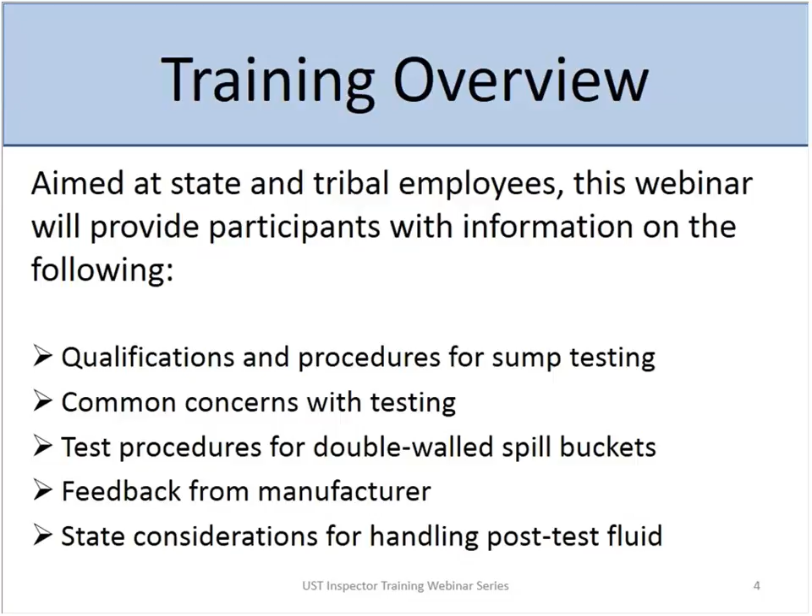All right, good afternoon, everybody on the East Coast, and good morning to those of you on the West Coast. For those of you who don't know CROMPCO, we're a large testing service provider, UST testing service provider, primarily on the East Coast. If you haven't heard, or you've been living under a rock, you know we have new EPA regulations that we're going to need to deal with. So we're going to get into talking about the sump testing and spill bucket testing that's coming up. There's a number of changes that have been included in the regulations, including overfill, checking the overfill equipment in the tanks, checking ATGs, monthly walkthrough inspections. We're not going to be covering that. We're going to be focusing on spill bucket testing and containment sump testing.

So what you're going to need to do, you're going to need to get familiar with the new standard, PEI RP 1200.

RP 1200 has been developed since 2010. It began development when a committee was appointed by PEI in 2010 in anticipation of these new federal rules, and we were hoping to get it out in plenty of time before the new regulations. We did get the document out in August of 2012. It was published. As you know, the new EPA regulations didn't come out until 2015, so we were well ahead of the regulations, and then we actually just finished reviewing comments and making revisions to the document.

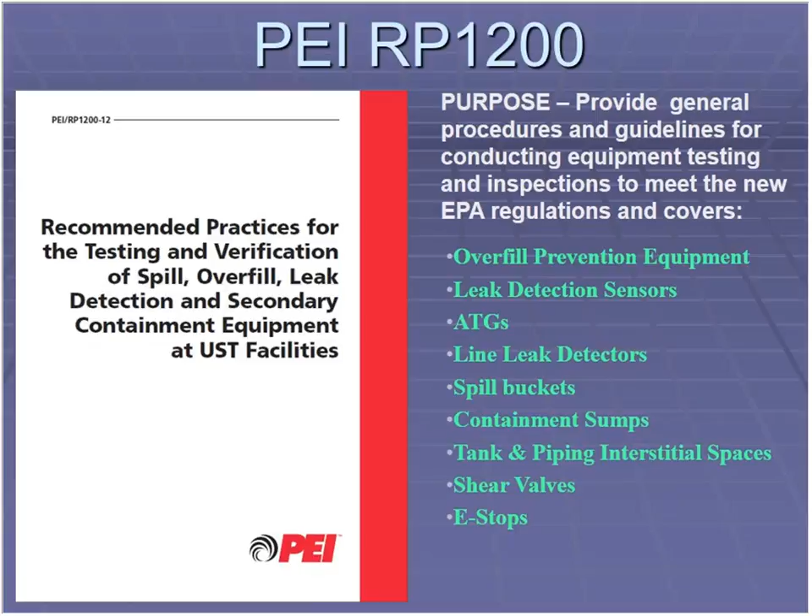So that's a little bit about the timeline of the document. The document covers everything with the new federal regulations: overfill prevention, leak detection sensors, automatic tank gauge testing, electronic and mechanical line leak detectors, spill buckets and containment sumps, which is going to be our focus today, tank and piping interstitial testing, shear valves and e-stops. It's all covered in that document, so you can use it to reference all those standards or tests.

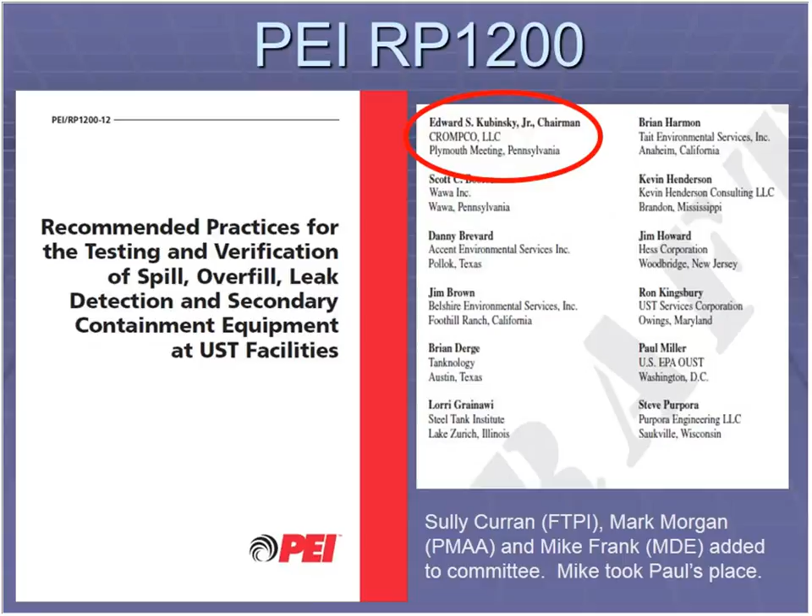I am the chairman of the committee, so I guess the buck stops with me. You can see all the different members of the committee. We had a good group of owner-operators, testers, installers, and regulatory agency representatives all involved in developing the document. We just recently added a couple new guys to the committee, including Mike Frank from the state of Maryland, who took over Paul Miller's place as the regulatory body.

So Chapter 6 of RP 1200 covers spill bucket testing and containment sump testing. With the new federal regulations, the first routine test date for spill bucket testing in most of the SPA states has not been determined yet. However, the EPA regs have gone into effect in the non-SPA states. I'm assuming everybody knows the difference between SPA and non-SPA states. So if you're in a non-SPA state, the first test of spill buckets is due by 10/13 of 2018.

So when we're doing testing of spill buckets, we're going to want to follow manufacturer's guidelines, RP 1200, which is an industry standard, or if the state develops a standard of its own, you can follow that. New buckets installed after the onset of the rules need to be tested at installation and then periodically thereafter, unless they're a double wall spill bucket being monitored monthly, in which case the EPA rules say those buckets would not be required to be tested. However, single wall spill buckets are going to need to be routinely tested, and double wall spill buckets that are not being periodically monitored are going to need to be tested.

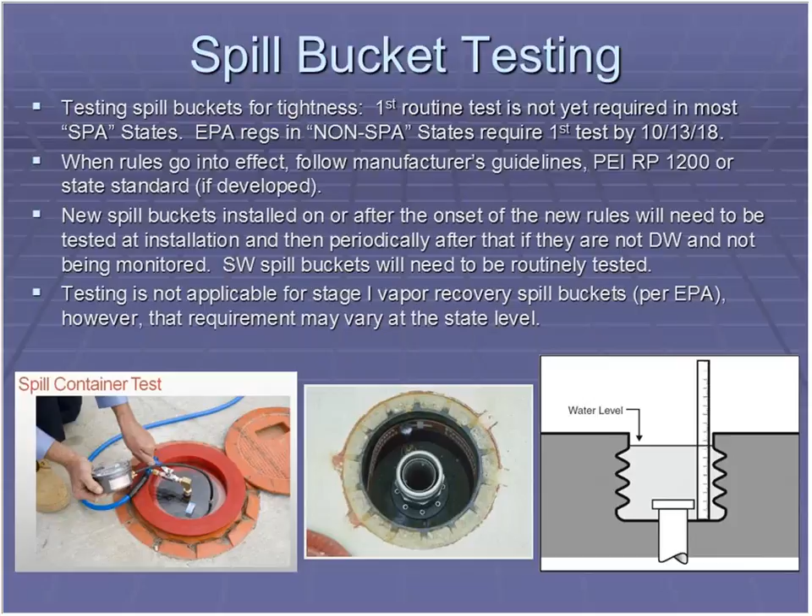Testing is not applicable for the stage 1 vapor buckets per the EPA. However, each state is going to need to determine that on their own, and you'll see in a few slides what I'm talking about there.

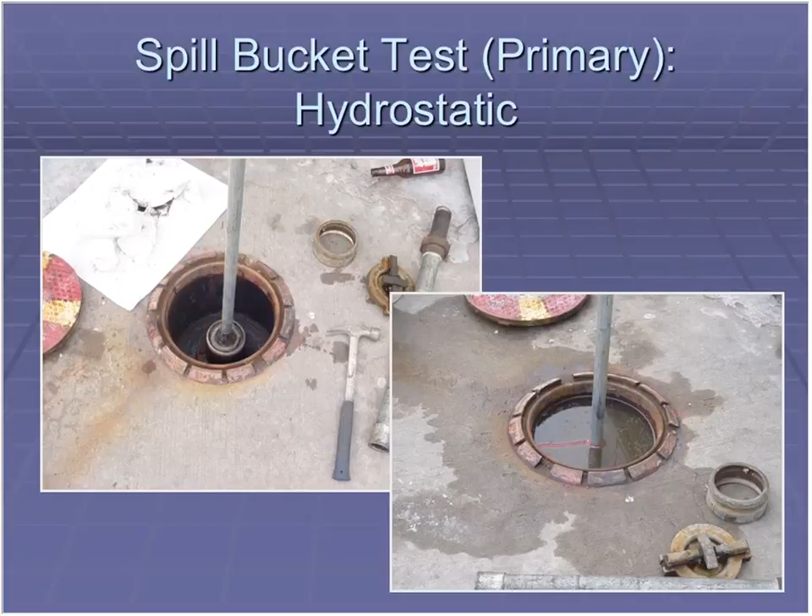So we'll start out with the hydrostatic testing of the spill buckets. As you can see here, we have some plumber plugs installed in the fill risers. Drop tubes have been removed. Spill buckets have been cleaned out. We find all kinds of crazy stuff in the spill buckets. Beer bottles are not uncommon either, but we want to clean these spill buckets out as best we can before running a test.

So here's what it says in RP 1200: you're going to clean, inspect, and repair any defects of the bucket before running a test. You can leave the fill adapter and cap on when you do the test. RP 1200 has given the testers and owners latitude to make a determination if they want to run the test with the fill cap installed, or they can remove the cap and adapter and use a plumber's plug and seal down below the drain so you're testing just the bucket.

Obviously, if you're allowing the drain valve to be installed during the test, you want to make sure that the drain valve is leak tight before doing the test, or remove it and seal it. You're going to fill the bucket to within 1.5 inches of the top of the bucket. You're going to use a straight edge and measure the water to 1/16 of an inch. You're going to wait 1 hour, and then the pass or fail criteria is 1/8 of an inch drop over the course of an hour. If it drops 1/8 of an inch or greater, the test is considered a fail.

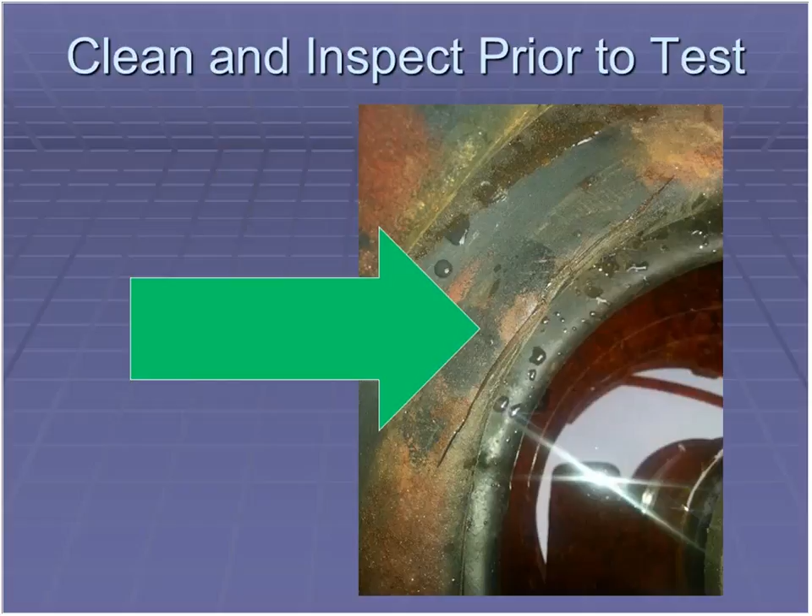So here's some things you want to look at when you're preparing to run a spill bucket test. You want to look for any cracks or holes in the spill bucket, small cracks. For large cracks like this, you're not going to want to run a test just to confirm a failure.

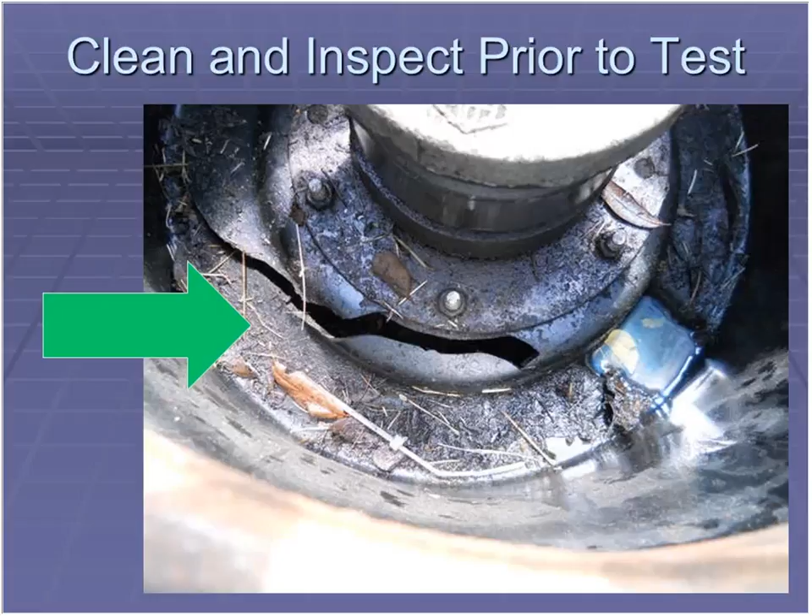Obviously, the spill buckets have most likely contained fuel, so you don't want to put water in there and knowingly let it release into the environment. So this is something that we would consider a visual fail. We would fail that spill bucket just on visual confirmation, let the owner know and provide a test result to the customer and regulatory agency.

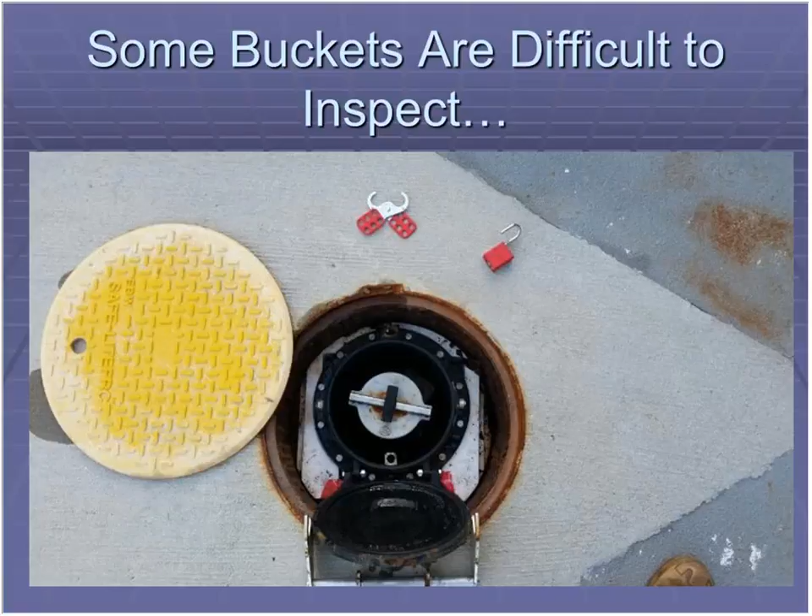Now, some of these spill buckets that you're going to come across are going to be difficult to do a good visual inspection on, as you can see here. And this is going to cause problems for these monthly visual inspections as well. So some of these spill buckets are very hard to do a visual inspection. We're going to have to maybe use a mirror and a flashlight to get in there, intrinsically safe flashlight for safety purposes.

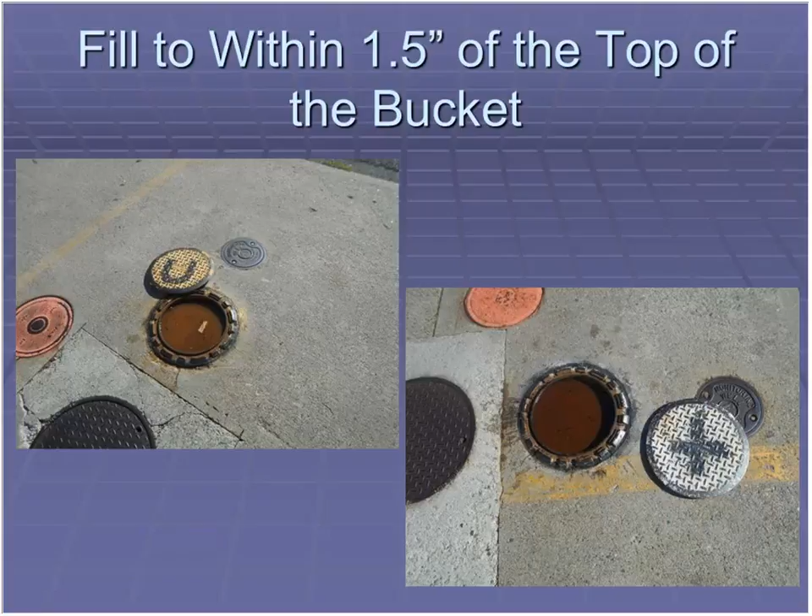So try and inspect them as best you can. And then if you're leaving the cap and adapter in place, this is typically what you're going to see when you're running your spill bucket test. Fill it up to within 1.5 inches of the top and run the test for an hour.

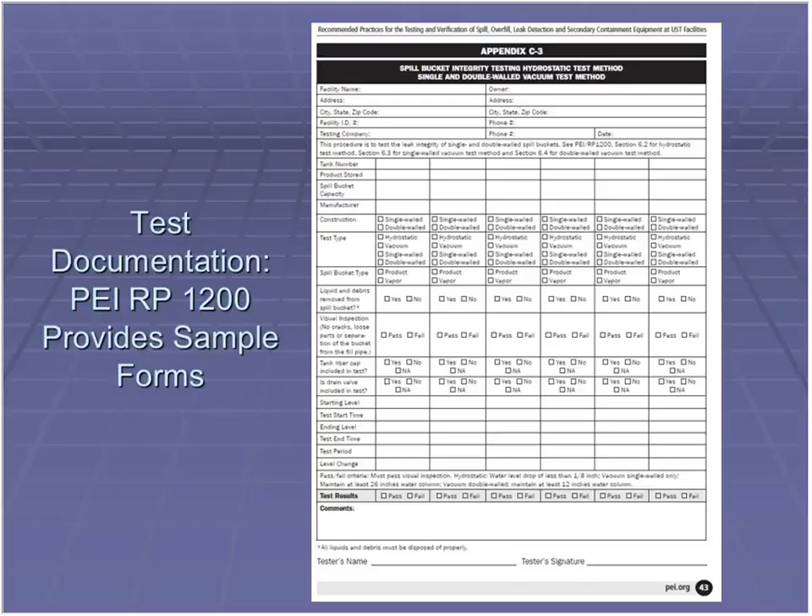Now, in the back of PEI RP 1200, we do provide some sample forms for documenting these tests. So if a state is looking at developing their own forms, you can look at the RP 1200 document. All the testing companies, us included, we have our own forms. These things may be changing over the years. I know a lot of states are considering developing their own forms. The state of Maryland just came out with their own form just a couple days ago, and we're going to have to look at including that into our system.

So moving on from hydrostatic testing of spill buckets, now I'm going to get into another option that you can do for testing spill buckets, which is vacuum testing.

Basically, if you're doing vacuum testing, you're going to do the same thing you do with hydrostatic testing. Clean, inspect, repair any defects with the spill bucket. You can leave the cap and adapter in place, or you can use some type of plumber's plug to isolate the tank from the vacuum test. Make sure your drain valves are leak tight. Put the cover on - it's a single wall spill bucket. You're going to apply 30 inches of water column vacuum. RP 1200 says hold it for 1 minute, and as long as the vacuum level is above 26 inches after that 1 minute, the test is considered a pass.

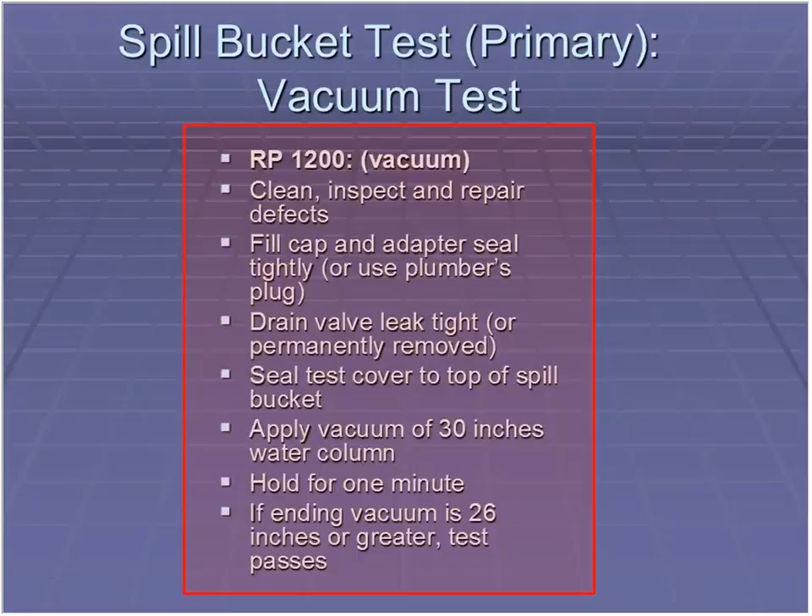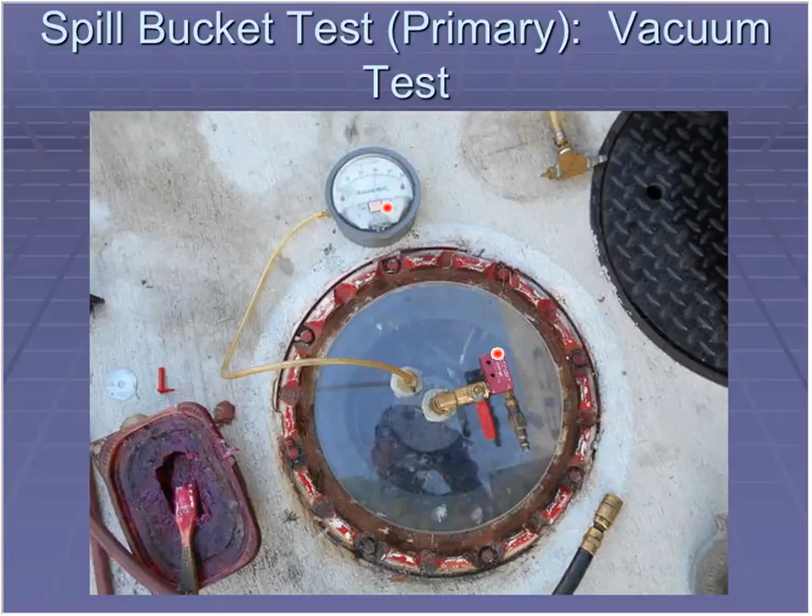Here's some more pictures of primary testing, spill bucket testing of a primary bucket. Here's a single wall bucket. You can see there's a cap installed on the fill riser to isolate the tank from the test, and a little bit better picture of the small venturi that we're using to create the vacuum. 30 inches of water column vacuum, can't drop below 26 after 1 minute.

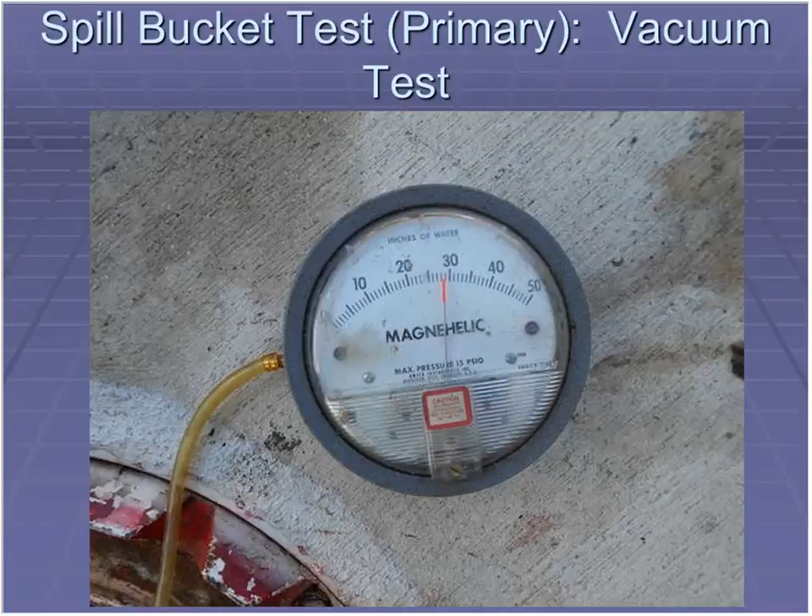So if we're testing double wall spill buckets, some of the manufacturers you'll hear about a little later in the program, but we have a general guideline for testing the interstitial space of double wall spill buckets. Again, clean, inspect, and repair any defects. You're going to attach your hose to the secondary access point of the spill bucket. And when we're doing the interstitial, we're only going to apply 15 inches of water column vacuum as opposed to 30 inches for doing the primary. Again, we're going to hold for 1 minute, and after 1 minute, as long as the vacuum is 12 inches or better, the test is considered a pass.

So some things that you want to consider as you're formulating your regulations over the next 18 months or so: what about double wall spill buckets that are not being monitored? Obviously, EPA says that they're going to need to be tested. So I use Maryland as an example here. The state of Maryland, who we routinely do business in, we've asked them, is the test of the primary spill bucket acceptable in Maryland? And actually they say no - we must test the interstitial space of a double wall spill bucket in Maryland. That's what they require. Other states are going to need to interpret this and provide guidance to owner-operators and those doing testing in your areas.

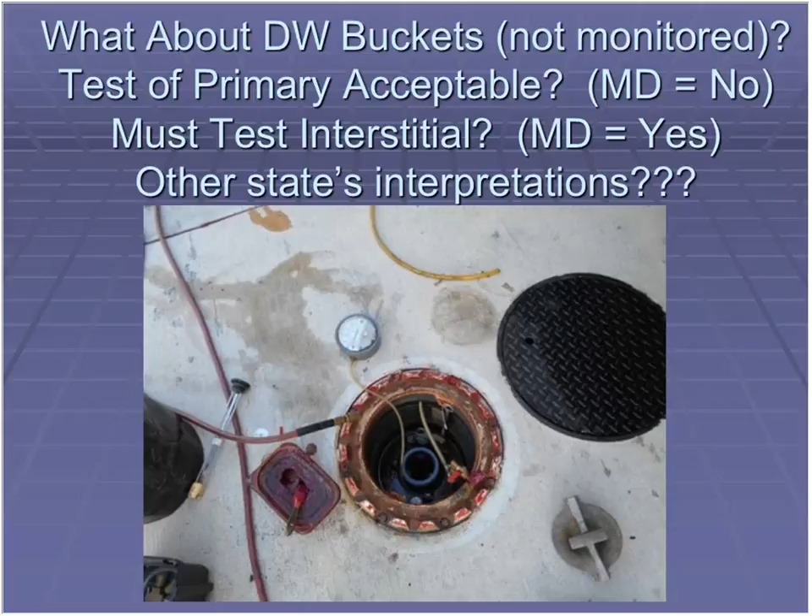All right, some of the spill buckets, double wall spill buckets, have electronic sensors and there are also mechanical gauges installed in them. So if the bucket's double wall and it's monitored monthly. According to the feds, no periodic test required.

However, the state of Florida just came out with their new rules. Double wall spill buckets still have to be tested every 3 years. Maryland, we're testing the interstitial annually. Other states, what are you going to do when it's your turn to formulate your regulations?

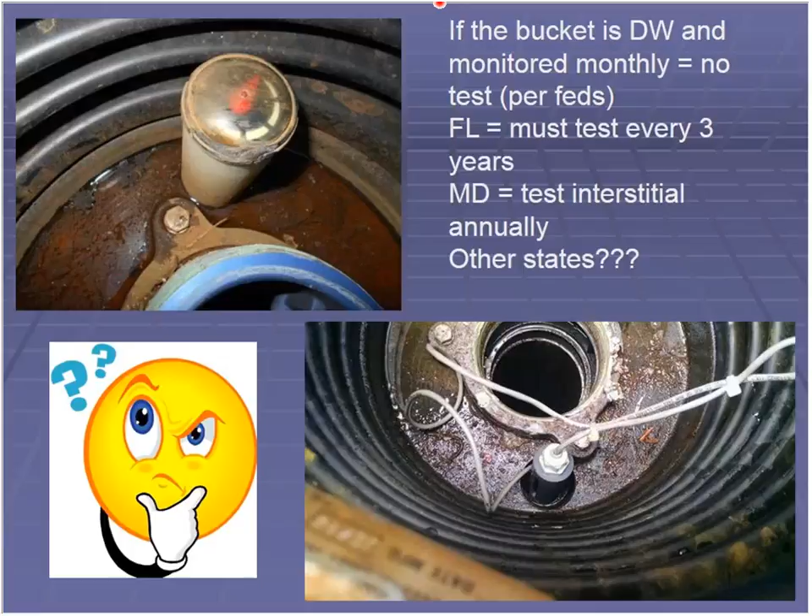Another caveat that we run into: if the bucket's double wall and it's monitored with a gauge, a couple states are requiring that the owners verify that that gauge is checked for proper operation once a year. State of Maryland, state of Florida.

So we need to physically remove the gauge. This type of gauge, we have to dip in a cup of water and make sure that the gauge is functioning properly, and then reinstall the gauge back into the double wall spill bucket. Again, what are other states going to do with this?

Something to think about. As I mentioned earlier, we do see spill buckets installed on the stage 1 vapor recovery port of your gasoline tanks. According to EPA, no test is required for the stage 1 vapor. State of Maryland says yes. What are other states going to do? This is a question that routinely comes up with our customers and that we need to have the answer for. So be prepared to provide guidance on these things as we move forward.

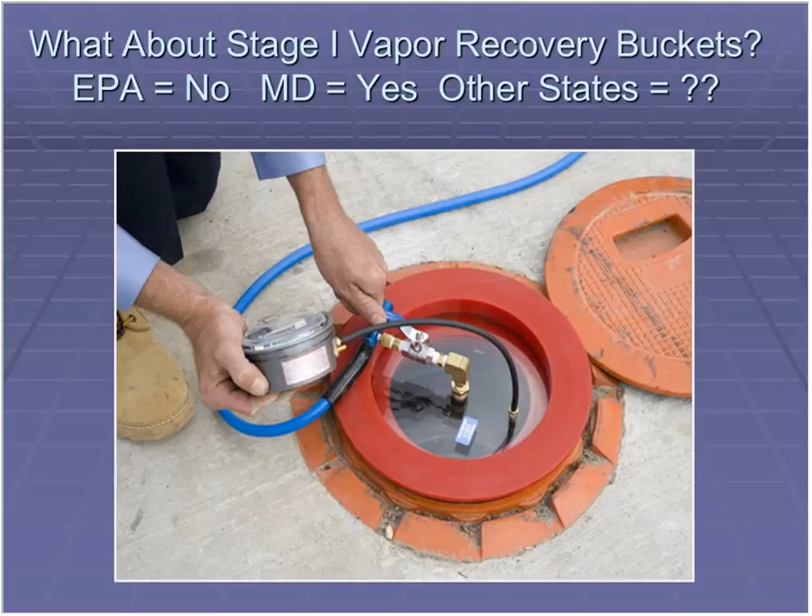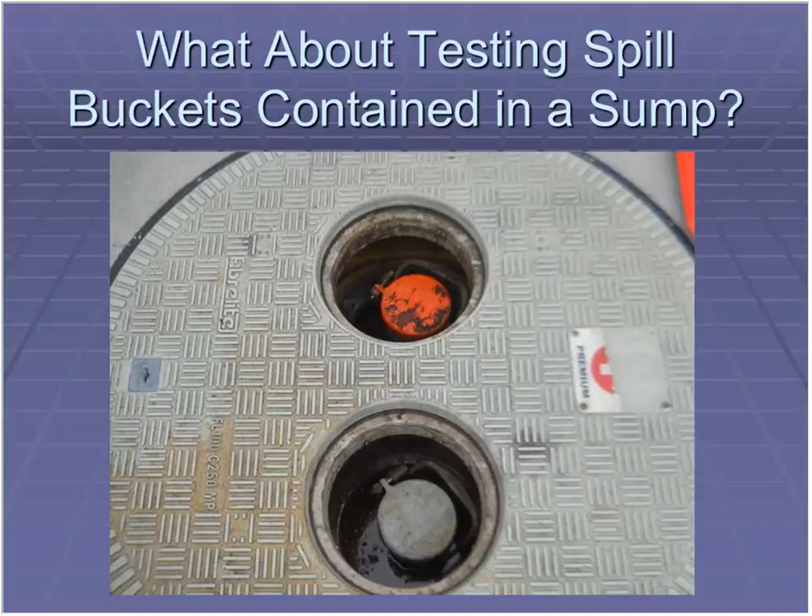Also, what about testing a spill bucket in a containment sump? You have a sump underneath the bucket. Do we really need to test the bucket? You're going to need to provide some guidance on that. These are some things that we typically see out in the field.

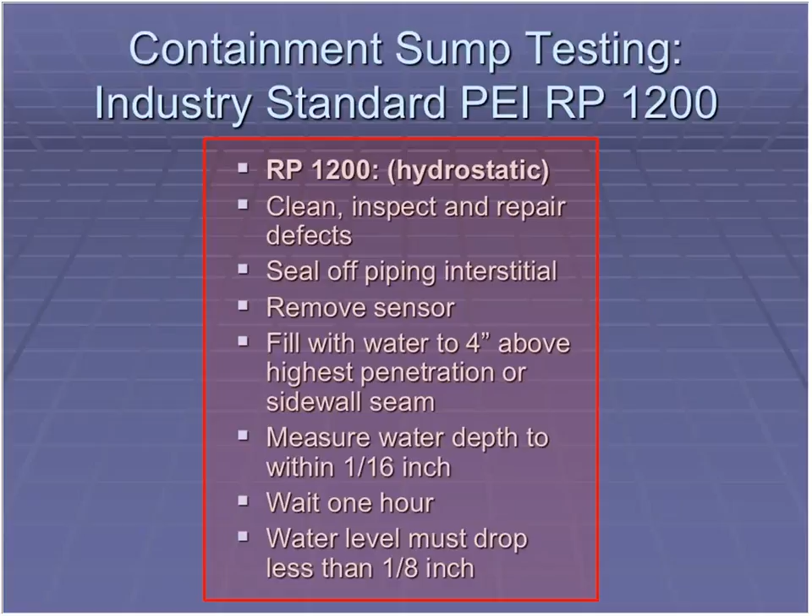We're going to fill the containment sump 4 inches above the highest penetration or sidewall seam. Again, just like the spill bucket, measure to the 1/16 of an inch, wait 1 hour, and the pass-fail criteria is 1/8 of an inch or greater is considered a fail. 1/8 of an inch or greater loss in the containment sump over the course of an hour is considered a fail. So again, you're going to want to take a real good look at all your penetration fittings and your sump seams prior to doing the test.

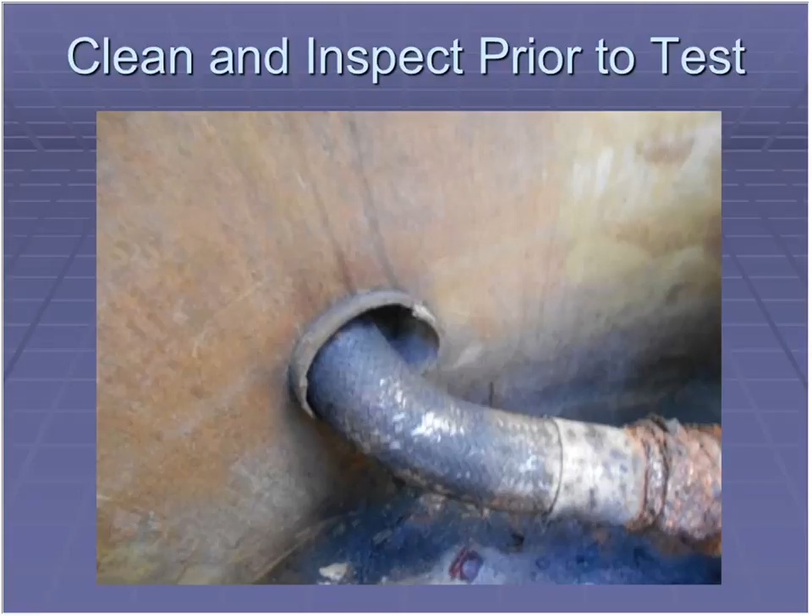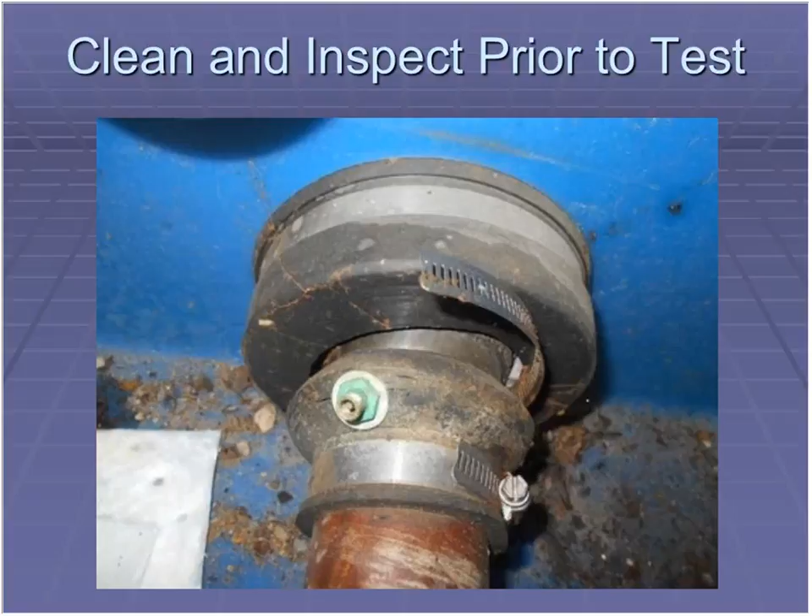Obviously, something like this, you're not going to be able to test it because you can't seal off the piping. Here we see bad boots. These are typical things that we see when we're going out to do testing. And in these cases, you're not going to want to run a test just to confirm the fail. You're going to want to get that repaired and ready to test properly, not just throw the water in there so that it gets into the secondary containment.

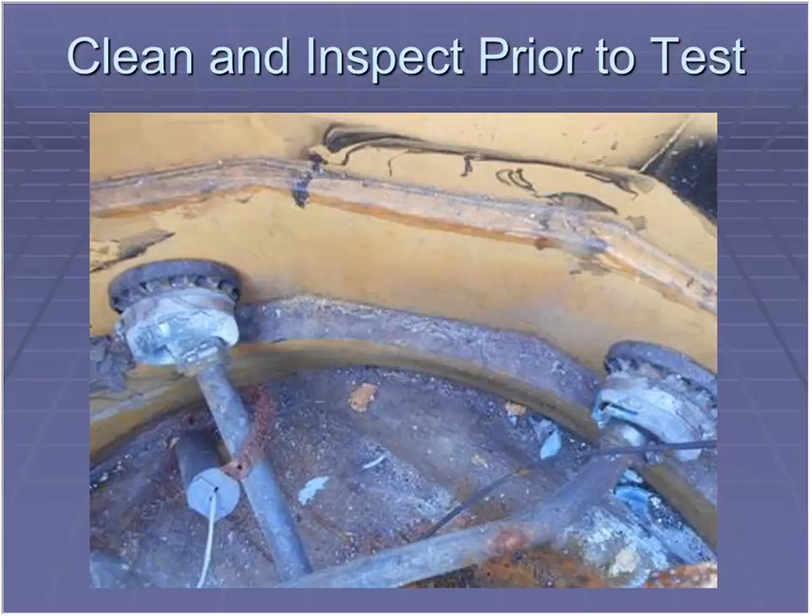So again, more pictures of what we see when we're going out to do containment sump testing. Make sure you take a real good look at these sumps before running a test. Electrical conduits are often a problem as well, and we've run into some cases where we're actually filling up above electrical conduit junction boxes. We're going to need to make sure that those are able to be sealed off properly as well. We don't want water getting into the electrical conduits.

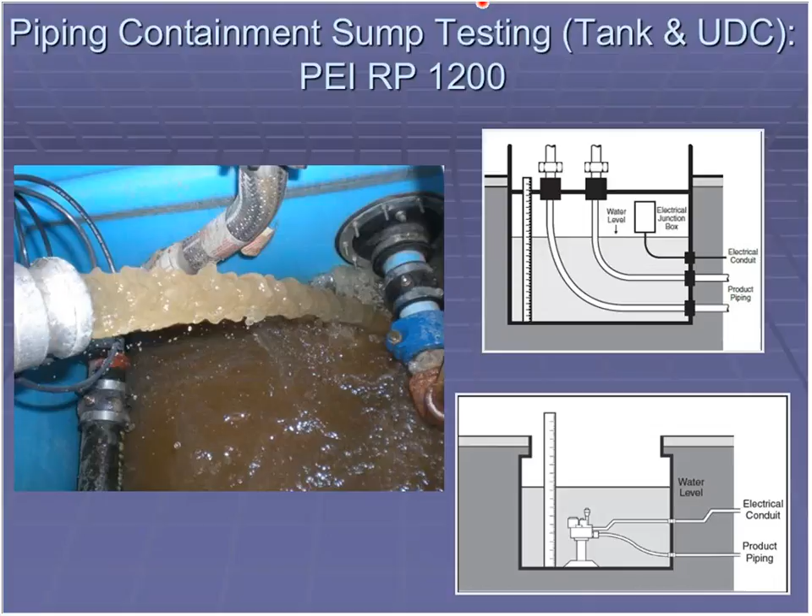So once we've done a good inspection of our sump and we're ready to fill them with liquid, here we are filling a dispenser containment sump. We're going to fill it 4 inches above the highest penetration or sidewall seam, measure it, and run our test. Again, RP 1200 provides sample documentation that you can use when doing the testing.

Now we get into the questions again, what about testing sumps that contain spill buckets but no piping in them? So there's no piping leading out to the dispensers under this containment sump. Does it need to be tested? According to EPA regulations, no, because this sump would not be relied upon for release detection. However, other states have said yes, we want all sumps tested. So you're going to need to make that determination when you're coming up with your new rules. Another picture of what we typically see.

So I'll stop right here and take a question or two on sump testing. Sure. So thanks, Ed, and thanks to the audience, everyone. We've got a lot of questions here, so I do have a running docket that I'm keeping. There's no way we're going to get to all of them today, but I will try to cherry pick a few out of here.

Let's see. If you fail the vacuum test, can the owner turn around and use a hydrostatic test to try and pass, or do they have to stick to the vacuum test?

That's a great question. We have that conversation with our customers. Just a note about vacuum testing: in our experience, it's a little bit more difficult to pass a vacuum test than it is the hydrostatic test. So a lot of customers of ours will ask us to run a vacuum test of the spill bucket, and if it doesn't pass the vacuum test, then we'll run the hydrostatic test, and if it passes the hydrostatic test, it will be considered a pass.

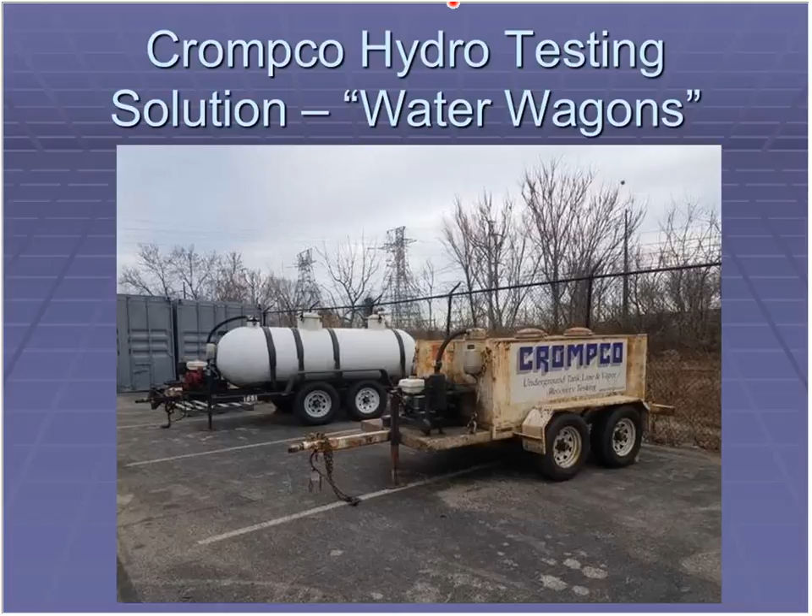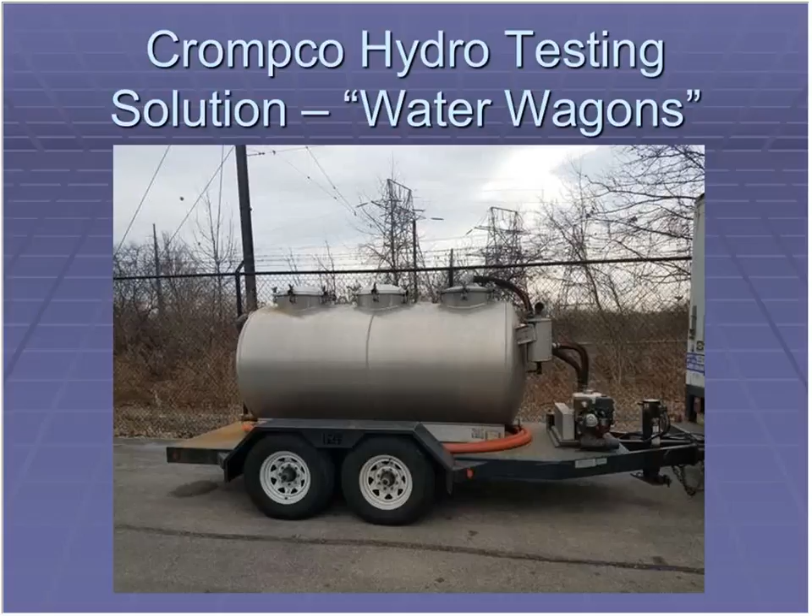These are some of our older water wagons, but this is the latest and greatest. It's about a 500-gallon tank that we fill up with water. We trailer it to the site, use the water for a couple tests, and then dispose of it. So back here at our yard, we have a large potable water tank where we have clean, fresh water that we use for testing, and we can somewhat rapidly fill up our water wagons. And then we also have a 5,000-gallon trailer in our yard where we pump the dirty water after containment testing, and then we have a vac truck company come out and clean that trailer out periodically and properly dispose of the water after testing.

I know that Natalie and Heather are going to get into the water disposal questions, but I just wanted to share with the audience that's how Crompco handles hydrostatic testing of containment sumps. I'll take a question or two real quick on that. If not, we'll move forward. I think we're all set on that for now. Okay, we'll keep going then.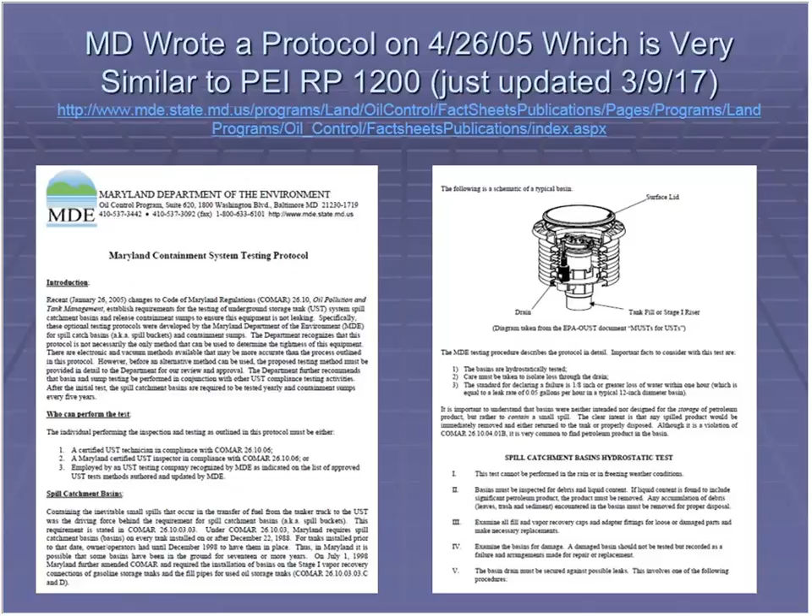All right, I'm going to share with you some data that we've run over the course of several years, specifically with the state of Maryland. We've been doing containment testing in the state of Maryland since about 2004, 2005. Maryland was the first state that I was aware of that came up with a hydrostatic containment testing protocol. They just updated their protocol and developed a form just a couple days ago, as I mentioned. And the RP1200 protocol was based very much on the Maryland containment protocol.

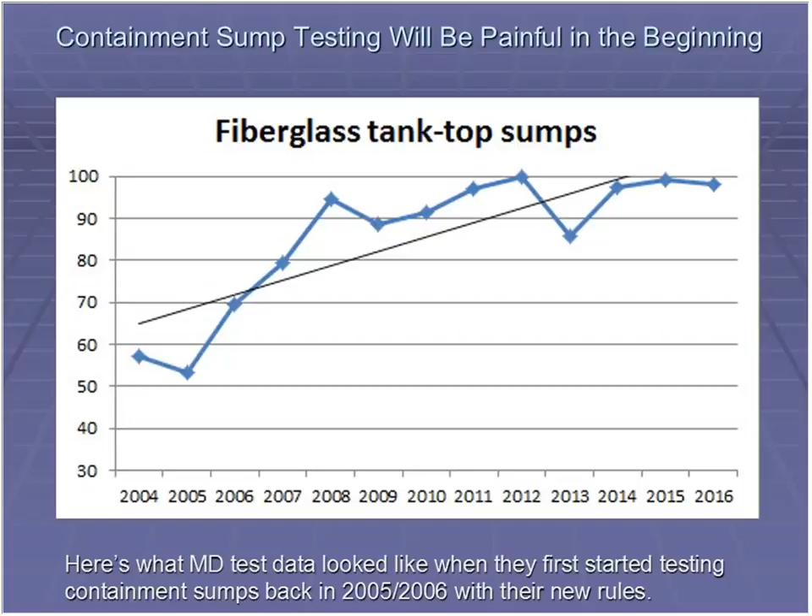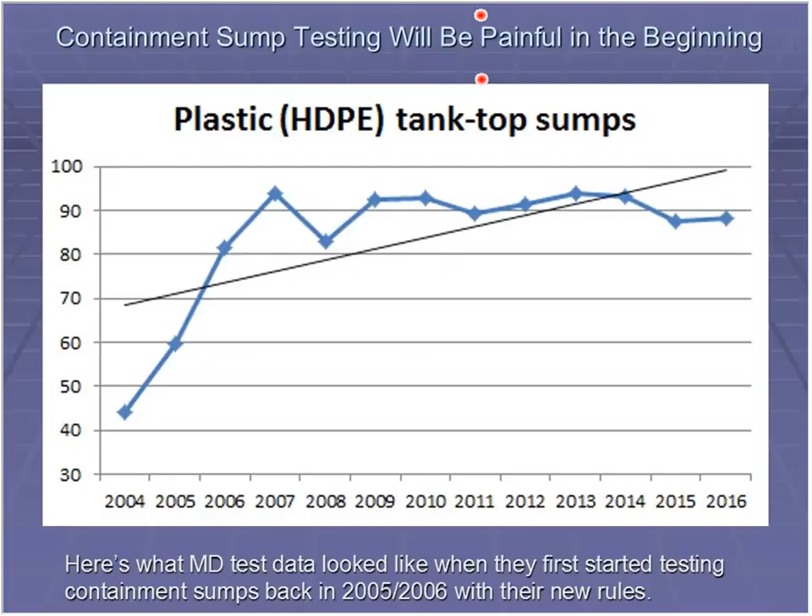Here's some data that we compiled on fiberglass tank top containment sumps. We saw just a little bit better than a 50% passing rate when we first started testing, but as you can see over the course of the years, things did get better. So these are all passing percentages of tests. Your high-density polyethylene sumps didn't fare quite as well as the fiberglass sumps. We saw just over a 40% passing rate when we first started testing back in 2004, and we're up around the 90% passing rate right now.

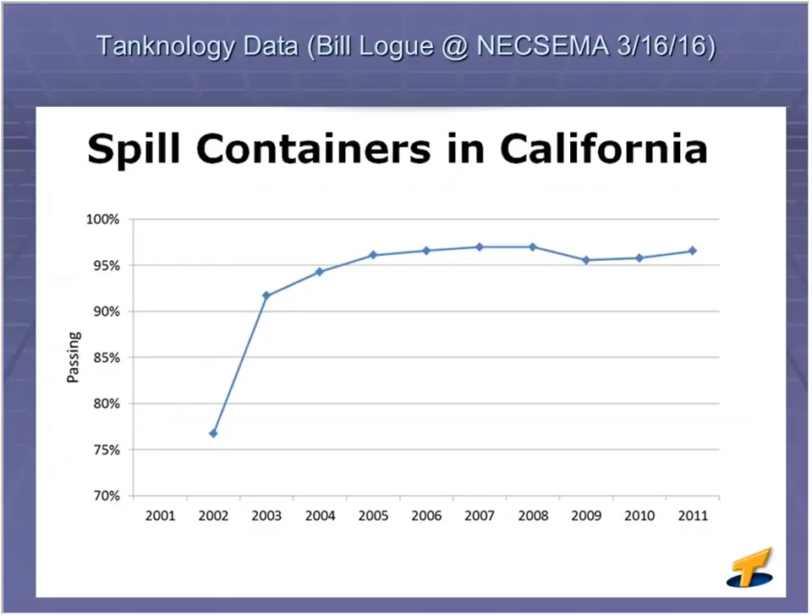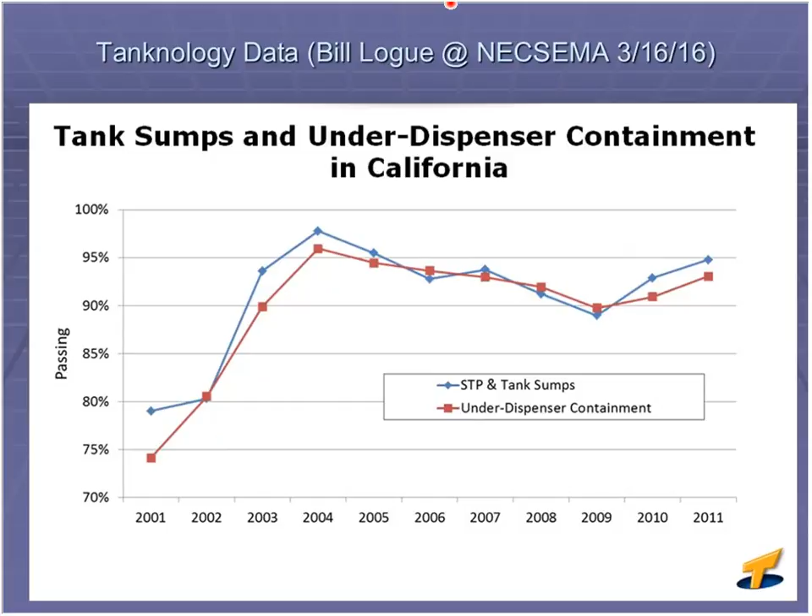There's going to be issues discovered. A lot of repairs are going to need to be made. New spill buckets going in. So that's what we can expect. But the bright side is things do get better over time.

So with the RP1200, we did receive a lot of comments about considering going to a lower level of testing, and as the committee discussed that, we didn't feel that it was the best move for industry. However, we know that some states are considering allowing for low-level testing. The State of Massachusetts in 2015 put out their new regulations, and they said that if you have a sensor in your sumps, you only need to test to the level that the sensor will activate.

And if you don't have a sensor, you'll need to hydrostatically test your containment sumps to the top of the sump. So what we saw between January of 2015 and toward the end of last year was a lot of customers putting in sensors in their dispenser containment and tank top containment, so they didn't have to hydrostatically test their sumps to the top. Because as you know, once you get over the penetration fittings, that's where a lot of your problems are, and you're going to see failures. So if the option was there for them to test below the penetrations, they wanted that, so they put in sensors in Massachusetts so they wouldn't have to test above the penetrations.

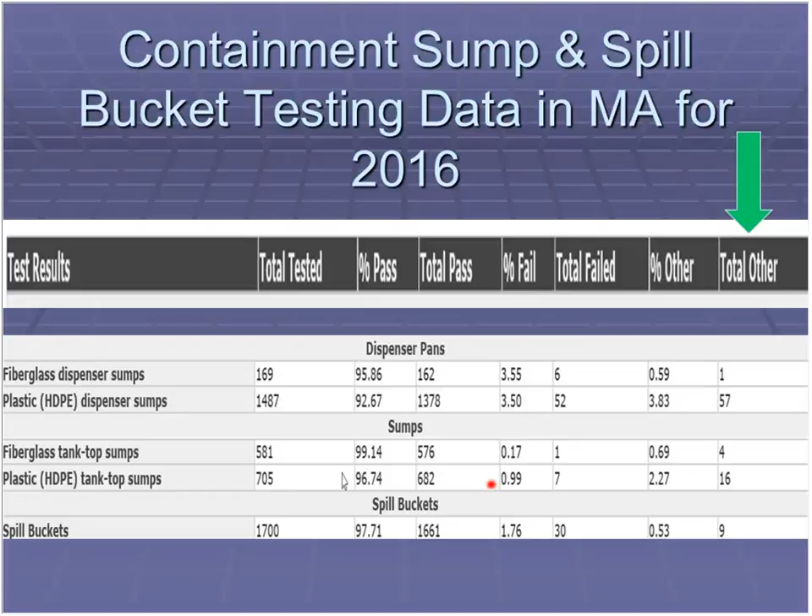So from the tester's standpoint, we do have a little bit of confusion when going from state to state to do the testing. One state's regulations here say that containment sumps need to be liquid tight for at least the bottom 3 inches in order for the leak detection sensors to work, and there can't be any penetrations below 3 inches. However, in the back of their regulations, they do say sump and containment testing should be done to the PEI RP 1200 protocol, which is filling it up to 4 inches above the highest penetration or sidewall seam. So it's just kind of interesting wording that you only have to be liquid tight at the bottom, but we're going to need to test above all the penetrations.

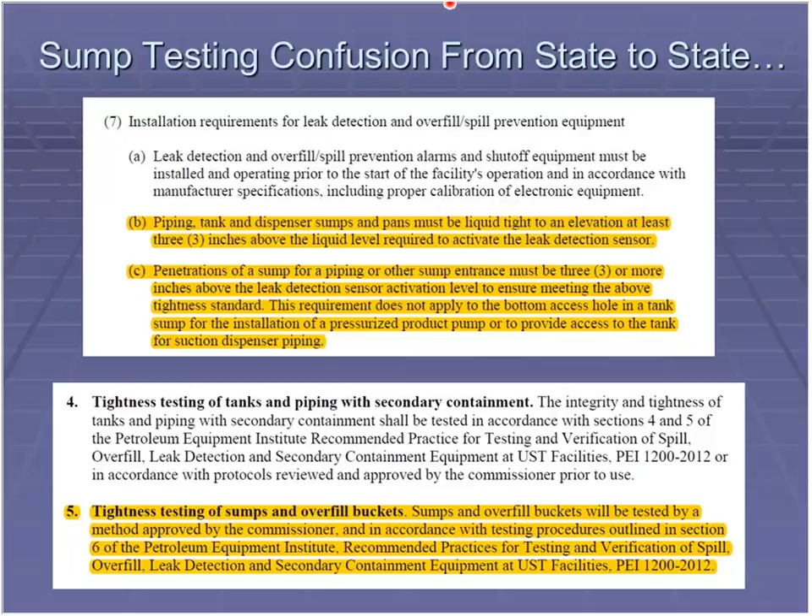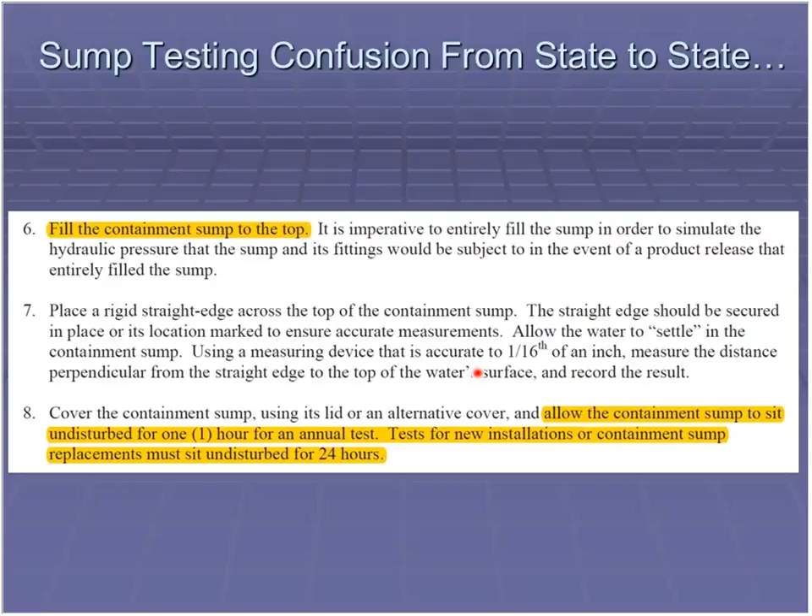Another state that Crompco deals with says it doesn't matter whether or not there's a sensor. All containment sump testing, we're going to fill the containment sumps to the top. For your existing sites, you're going to allow the test to run for 1 hour. However, for brand new installations, you're going to need to run the test for 24 hours. Another state in the New England area, again, fill the sumps to within 1 inch of the top of the sump, but they want a 3-hour test. So just pointing out here it kind of gets confusing from state to state.

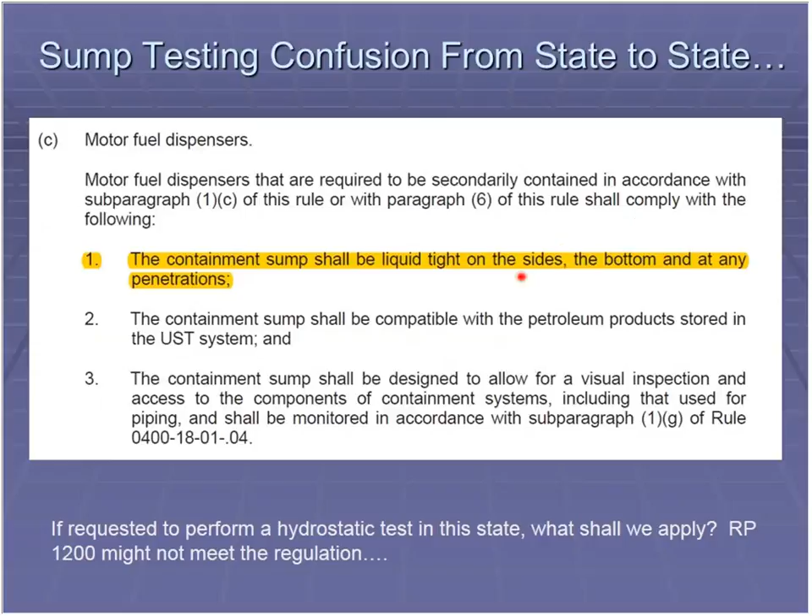Reading through another state's regulations, they say containment sumps shall be liquid tight on the sides, on the bottom, and at any penetrations. They don't reference any standard for doing containment sump testing, so if an owner contacted us, we have to think about, well, what do we apply in this case? Do we go with RP 1200? But it says the containment sump shall be liquid tight on the sides, the bottom, and any penetrations. In my interpretation, I'd have to fill that sump up to the top. So again, some things to consider when you're writing your regulations.

All right, any questions on the data presented? I'm sure there was. I presented similar data at the tanks conferences in years past, and there's always been a lot of questions, and I'll try to get to a few, but we got several other presenters we need to get to. So I'll take time for 1 or 2 questions here.

Sure. So I have kind of one big picture question. So obviously cost seems to be a bigger concern for owners. So wondering if you can comment on the cost of doing the testing with RP1200 for an average site with, for instance, 3 spill buckets, 3 piping sumps, and 4 dispensers, if you could kind of ballpark that.

That's a tough question. I don't really get into the pricing. What I can tell you is that Crompco doesn't charge for the water disposal. A big cost of containment sump testing and spill bucket testing is the per gallon cost of the liquid water disposal. We roll that into a unit cost; we may charge per spill bucket or per containment sump, or, depending on the customer, we may have one lump sum charge for all the customers.

So if I had to ballpark 3 tank top sumps, 4 dispenser sumps, and 4 spill buckets, and it's going to be a big ballpark, but I would say in the neighborhood of $2,500 in that area. But don't hold me to anything. I'm not the pricing guy here at Crompco. Thanks.

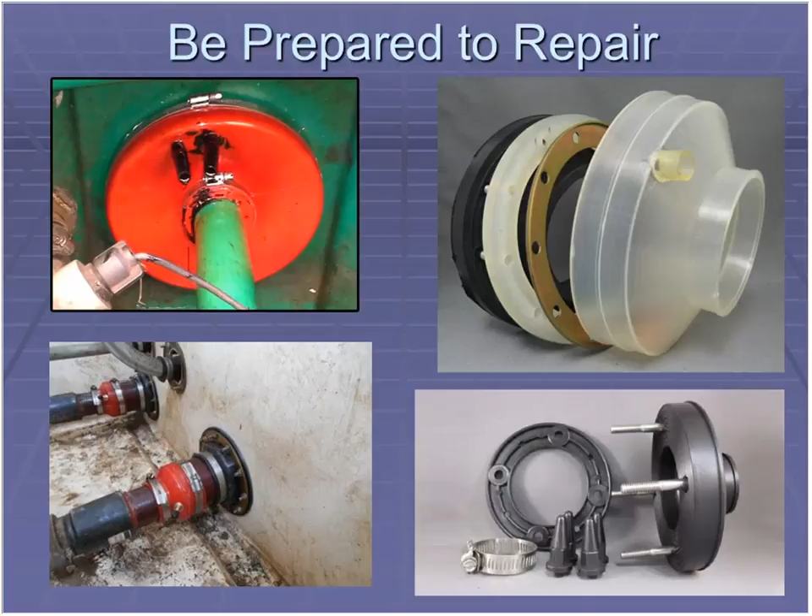So, with all this containment testing that's been going on, owners are going to need to be prepared to make repairs, and the containment sump penetration boots are a big problem that we run into with containment sump testing. We have specialized crews that do the repairs, and there's a number of manufacturers that provide repair options out there. There's Icon, there's Diversified Products Manufacturing, there's Bravo Systems. Those are the 3 that we're familiar with. We use all of them, and I'll just share a couple photos of different repairs that we've done in the past.

But you're going to want to be prepared to provide owners, operators, and testing companies with guidance on what to expect when it comes to containment repairs. Some states say 30 days. I'll be honest with you, to mobilize a crew to do containment sump repairs in 30 days can be challenging. So my suggestion is to give the owners some latitude with these repairs, because there's going to be a lot coming down the pike in a very short time. So, be prepared to work with everybody on getting these repairs done.

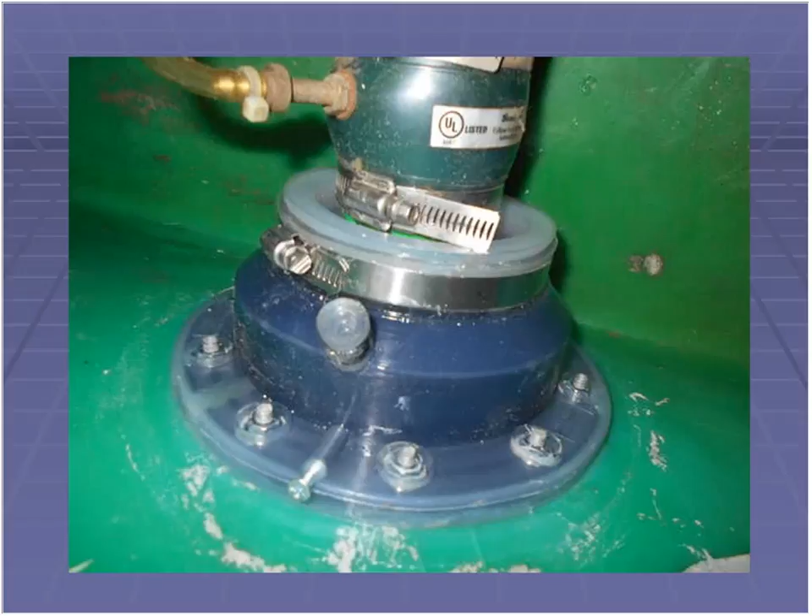All right, I'm not a repair expert. I'm familiar with some of the repairs that we do, but if you have any questions on repairs, I'll take a question or two. If not, we'll turn it over to the next speaker.

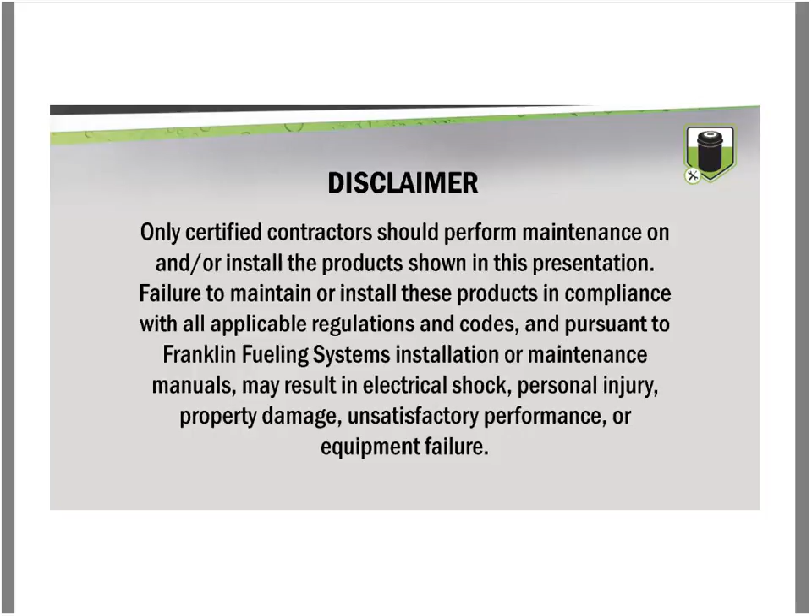Today we're going to discuss mainly the double wall Defender. I have some slides here from our newly updated training platform. We do ask that all of our contractors maintain their certifications, including both the installation and the testing of the bucket. We have a little disclaimer at the beginning of all our trainings.

What we'll cover here: the interstice sensor options, what are the indications of liquid present and what actions should be taken. We're going to talk about the specifics of testing our Defender spill bucket, both the single wall and the double wall interstice, some best practices on maintenance, and best practices on installation. I'll talk about some of those best practices, what you might see and why it would lead to an issue.

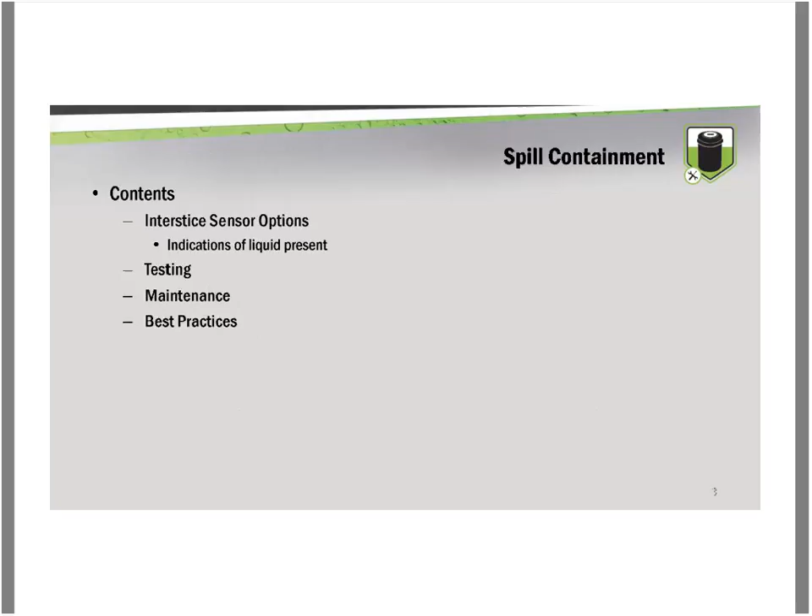On the safety side, we are dealing with the potential for spills and vapors when doing any of these inspections. Franklin Fueling is making a big push on safety. We have a project, High Vis, just released, providing information to contractors, distributors, and customers, reminding of all the different elements of safety, lockout tag out, making sure you're handling your liquids and testing for vapors on a regular basis. We always want to remember to wear PPE, even if you are doing simple inspections, and one of the most important is lockout tag out, or lockout tag out test out.

All of our installation manuals will carry warnings and alerts on basically different steps of the installation processes that could be a potential danger.

The double wall Defender series bucket is what we'll mainly focus on today. We offer two types of interstitial monitoring. Ed alluded to these a little bit in his presentation. We offer an electronic version that comes with our ULS, or Universal Liquid Sensor, installed, factory installed inside the interstice of the double wall section. The mechanical, we call it the integrity monitor - you saw one, and saw one actually being tested. Both of these are going to alert you immediately to the presence of any liquid, with the electronic probably being more easily detectable than inspecting the mechanical.

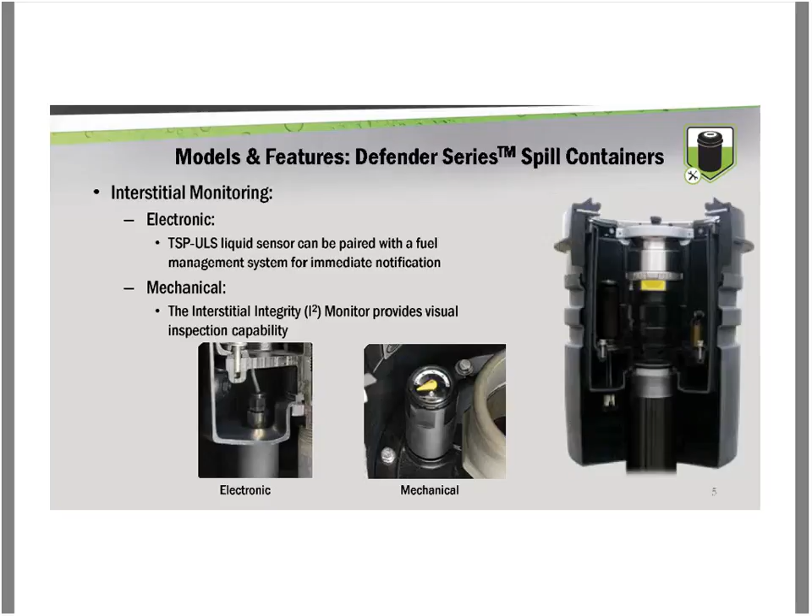The mechanical, or the I2 integrity monitor, uses a float that raises a dial to indicate any liquid present in the containment. Anytime the yellow dial is in the white, you'll see indicators for 1 drop, 2 drops, or 3 drops - that's just an indication of the amount.

We recommend as a manufacturer that anytime the yellow dial is in the white, that interstice be inspected and any fluids removed. At that point you would want to do a vacuum test to see if that interstice has been compromised. To reemphasize: anytime the dial is in the white, you've got something to inspect. There's no level of severity - whether it's 1, 2, or 3 drops, you look at it any time the dial moves into the white.

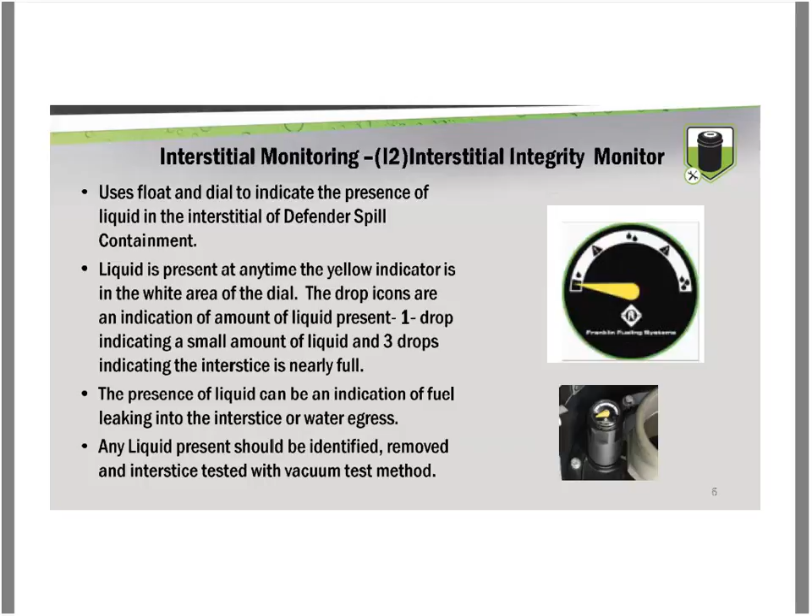On the electronic sensor monitoring, the ULS, or Universal Liquid Sensor, is connected to a tank monitor, be it the Incon Evo that we manufacture, and/or they can be connected to a Veeder-Root or other monitoring consoles. This will immediately let you know of any liquid present, produce an alarm, and record on an alarm history report depending on the operation of the console. To the gentleman's question before, we can program our consoles - I can speak to the Incon only really - to actually do positive shutdown.

Other options within the Incon allow it to send an email out to a compliance group, the marketer, or whoever's running the site. So there are various ways that information can be communicated, not just the alarm populating on screen or on a report, you can have a report sent out showing when the alarm occurred.

Just as with the I2 monitor, any liquid present, any alarm indication, you want to go out and verify there is liquid present and that there's not an issue with the sensor or something else. Any liquid present needs to be removed and a vacuum test performed. In the event the vacuum test fails, the bucket will need to be replaced.

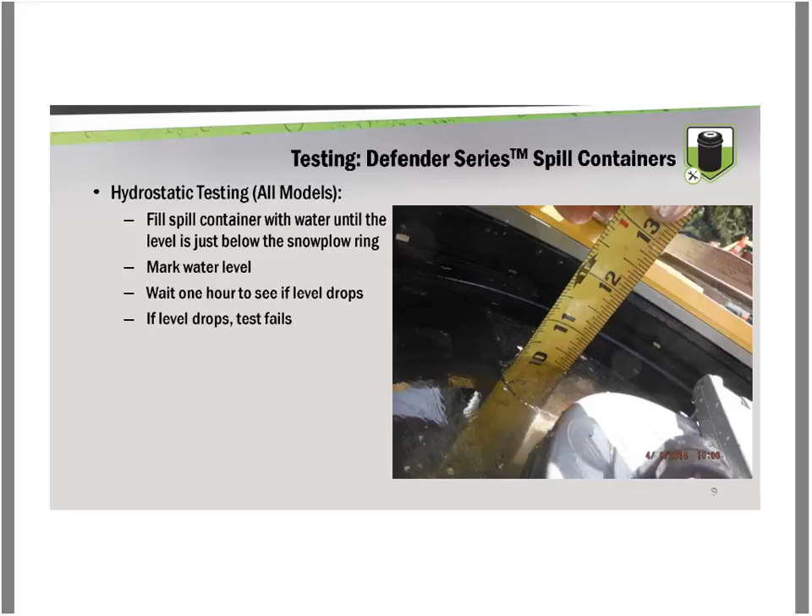For testing of the double wall and/or single wall, we recommend for the primary a hydrostatic test on all models. We fill that container with water right up to just below the snowplow ring, mark the level, wait one hour, and see if anything drops. If any level drops, the test will fail, and the bucket will need to be inspected and/or replaced if there is an issue.

On the vacuum, or on the interstice of the double wall, we've got an inspection port where we use a tool, our T7107, which screws into that port. We connect a vacuum source and a manometer, and apply vacuum until we hit 30 inches of water column, or 7.5 kilopascals.

We wait about a minute or so to allow that vacuum to stabilize, and then if we need to increase that vacuum to get it back up to 30 inches of water column, we apply the vacuum source if needed. After 5 minutes, if we are above 26 inches of water column, or 6.476 kilopascals, the test is successful.

So basically, within 5 minutes of reaching and stabilizing at 30 inches of water column, if you lose less than 4 inches of water column, you have passed. If you lose more than 4 inches of water column, the test is considered a fail, and the bucket will need to be replaced.

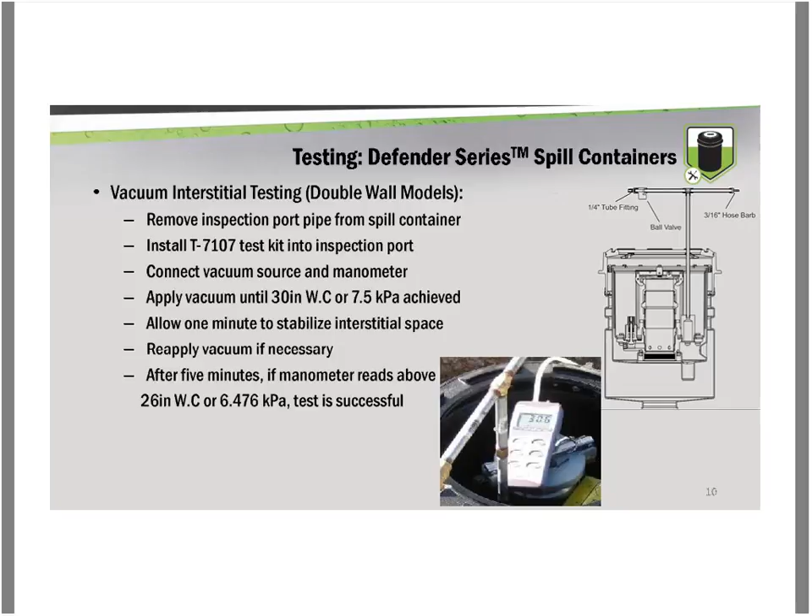For monthly maintenance, as a manufacturer we recommend some things, but we always defer to local code. Clean any dirt and debris from your snowplow rings, inspect the cover gaskets and replace if necessary, and inspect the container for any liquid, be it water or any other debris in there. As mentioned, beer bottles and whatnot - you want to get all that stuff out of there. That's on a monthly basis.

If you're using the I2 monitor, this is definitely a time you want to inspect that. Not having that electronic option, you actually have to physically go out and look at the monitor to see if you are seeing the yellow dial in the white. If that is the case, you need to remove the sensor and inspect for liquid and perform a vacuum test.

Look for any damage done to the bucket inside, any cuts or tears. If you do have the interstice, you want to inspect it. At that time, some folks may even have a requirement to go and actually flip the sensor to confirm it is actually working and reading properly.

With the electronic version, there is just a plug right above that can be taken out, and the sensor is directly below that. It can be lifted up, flipped upside down, which should then trigger an alarm.

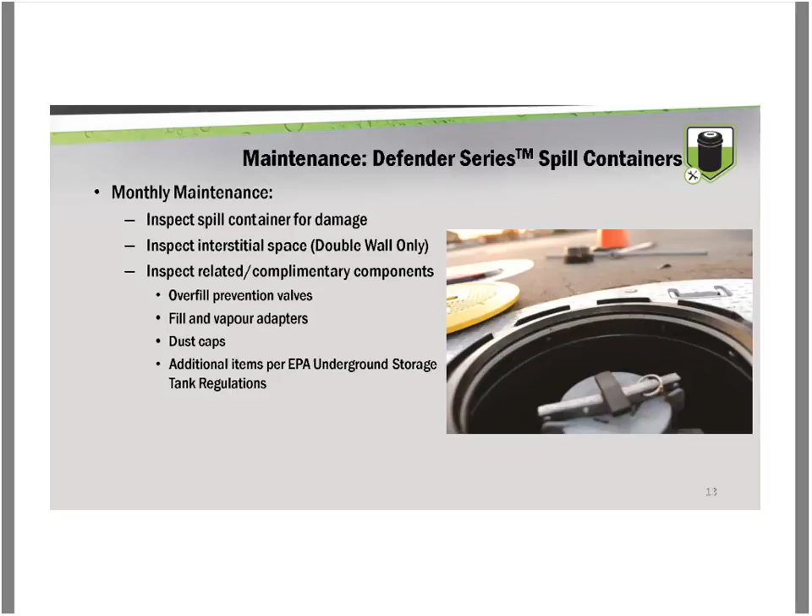Yearly, you want to inspect the interstitial monitoring equipment at that point. You've probably done a monthly check on the actual I2 monitor, reviewed any alarm history with regard to the electronic, and record all those inspections per local code.

In some states - I used to live in North Carolina - they'll require sensor status reports. Typically at startup, they want the okay, the alarm, and then the okay again. Depending on your setup, you might have to go a fourth sheet if you've got any other interstitials such as brine sensors on tanks, etc. And again, inspect all of the related complementary components - there may be a requirement at that time to also test that overfill prevention.

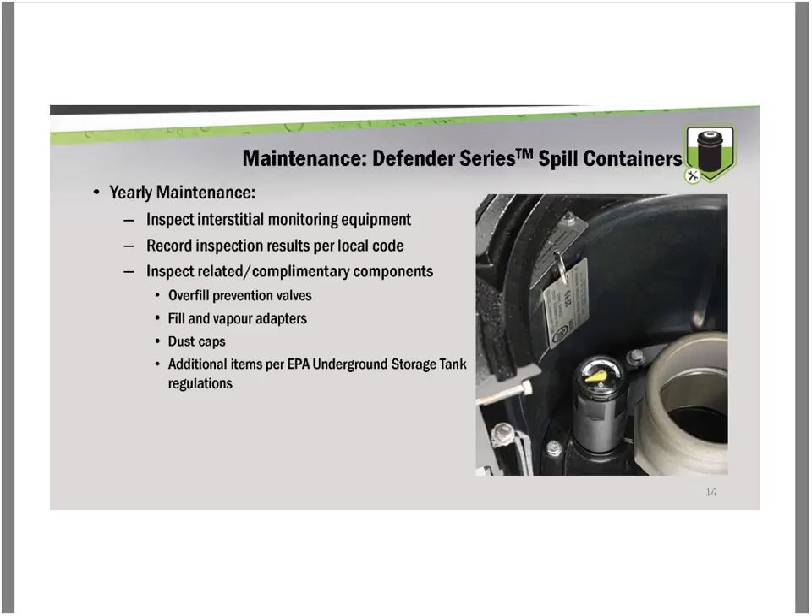So, best practices regarding our spill buckets, installation height. This is a big one. The Defender spill bucket is field adjustable and field replaceable. As you can see, the bucket sits inside what we call a gravel guard. So that bucket, if installed single wall, can be replaced as double wall without breaking concrete. And if you have a failed bucket, it can also be replaced without breaking concrete.

Which is a very large cost savings for the owner. The issue you see here is if the bucket is not properly set, or the gravel guard was not properly raised high enough at install, the snowplow ring and gravel guard will end up pushing down on the bucket. As that gravel guard load pushes down, the bucket's on the riser, and you'll start to see the inner bucket push in. If you do any inspections on a Defender bucket and see that bucket starting to bow in like that, there's more than likely an issue with install, and more times than not, the interstice will likely fail. In that case, concrete may need to be broken and that bucket installed properly.

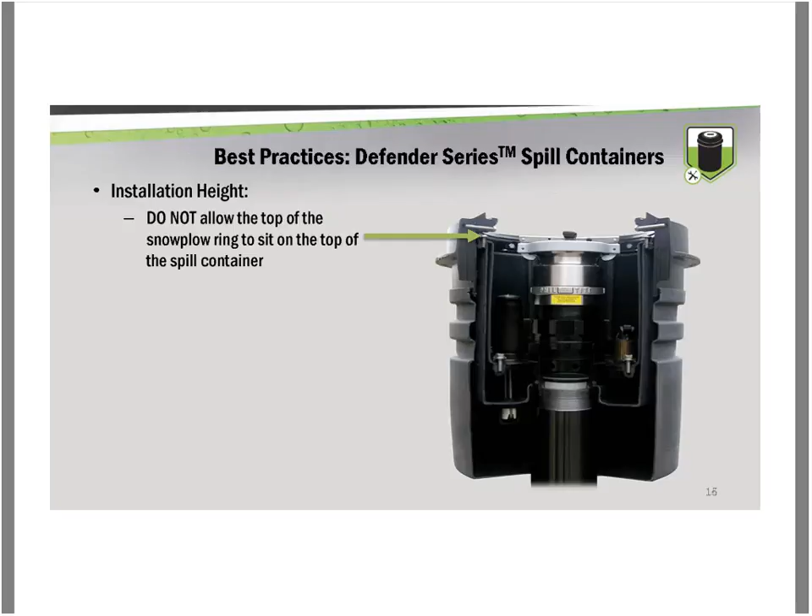The sensor cord grip comes installed by our factory prior to leaving and is tested. If that is damaged in any way, or if you disturb it and move it around... let me try to get my laser pointer to work. So you can see right here, that's actually a little grommet that is factory sealed. If that is disturbed and damaged in any way, or heaven forbid broken off, that creates about a half-inch hole inside that interstice, and therefore that bucket will never pass and will need to be replaced.

Again, we don't want any cuts or damage into the gravel guard, with the minor exception of the hole drilled for a conduit entrance for our electronic sensor. That can be approved anywhere on the side here. You're typically on this side, and it can actually come in through the bottom, then that's sealed with a compression nut and/or compression gland.

So with that, that's all I have. I'm more than happy to take any questions on the Defender spill bucket, or if you have any questions on the overfill, I can answer those. In addition, I was just at an install of a beta test. We will be coming out with a grade-level Defender series probably later on this year.

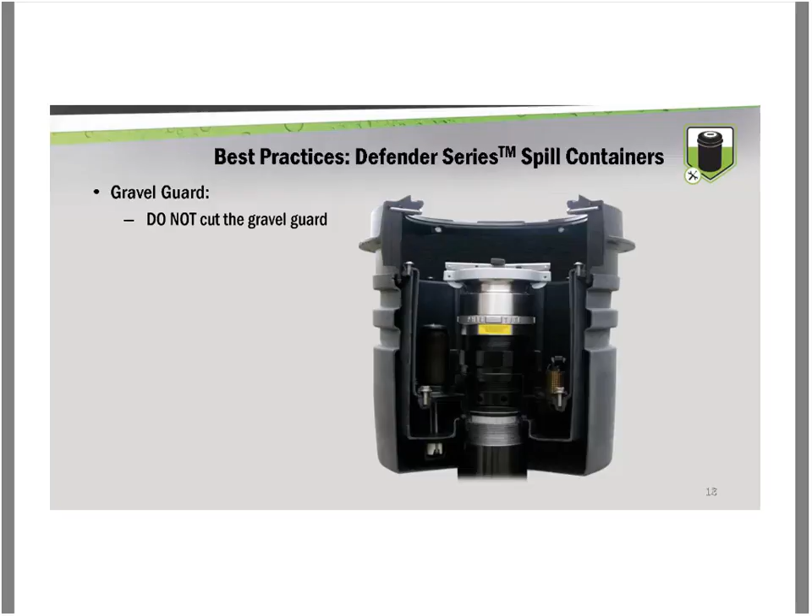Let's see, Drew, do I have my presentation up yet? You're still on Lauren's, so if you go to the little drop-down arrow on the top, there you go. Okay, got it. Thank you.

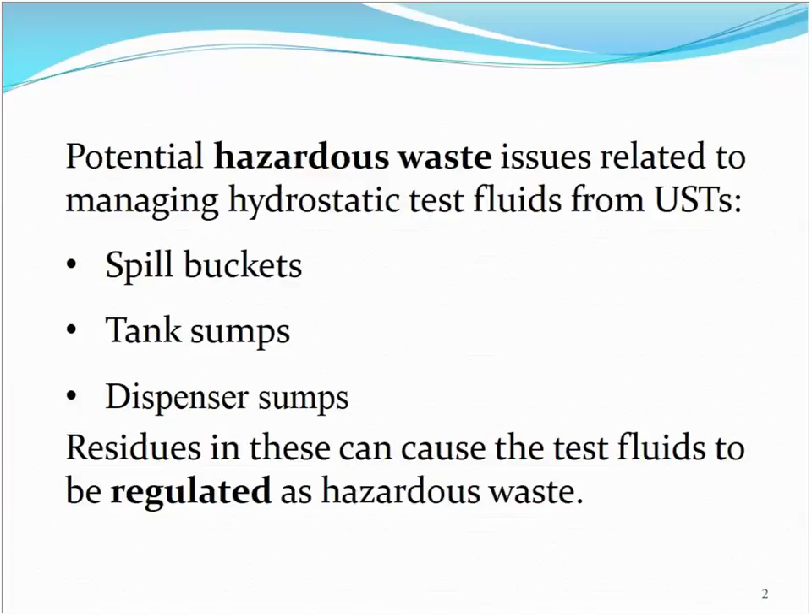Okay, so the approach that Idaho took is that residues in the fluids can cause the test fluids to be regulated as hazardous waste. And where we focused our discussions on was there's an exemption in the hazardous waste regulations for petroleum contaminated media and debris, and by media I mean soil and groundwater, in the instances where a cleanup is taking place for a release from a petroleum underground storage tank. And the media and debris is excluded from the hazardous waste rules if it only exhibits certain characteristics and provided the cleanup is subject to the corrective action requirements in 40 CFR Part 280.

So we took a look at that, and based on our interpretation and reading some EPA interpretations, we felt that we could not interpret it to mean that the test fluids are exempt. Because it's not a release or a leak from a tank system per se, it's more routine testing and maintenance. Again, other states can differ on that. Some states have said that these fluids can be exempt based on that rule. So just again, check with your state.

But that's what we took a look at, and we had discussions, again, between our underground storage tank program and our hazardous waste program. We talked to our Attorney General's office, and we talked to our EPA Region 10 in Seattle. And so the approach that we took is that the fluids are subject to a hazardous waste determination under RCRA, and that the contaminants in the fluids can potentially cause it to be regulated as a hazardous waste.

And just to quickly go through the recommendations then that we're giving to the owners and operators and contractors leading up to this requirement, like Drew and Ed and Lauren said, we highly recommend that the spill buckets and sumps be cleaned out and inspected prior to doing the test to keep the fluids as clean as possible. We recommend, but we don't require, that for the test that you use a new test fluid each time. And then if you're going to containerize the fluids after they've been used for a test, we'd like them to label them and date them until they can do their hazardous waste determination and figure out how it's regulated.

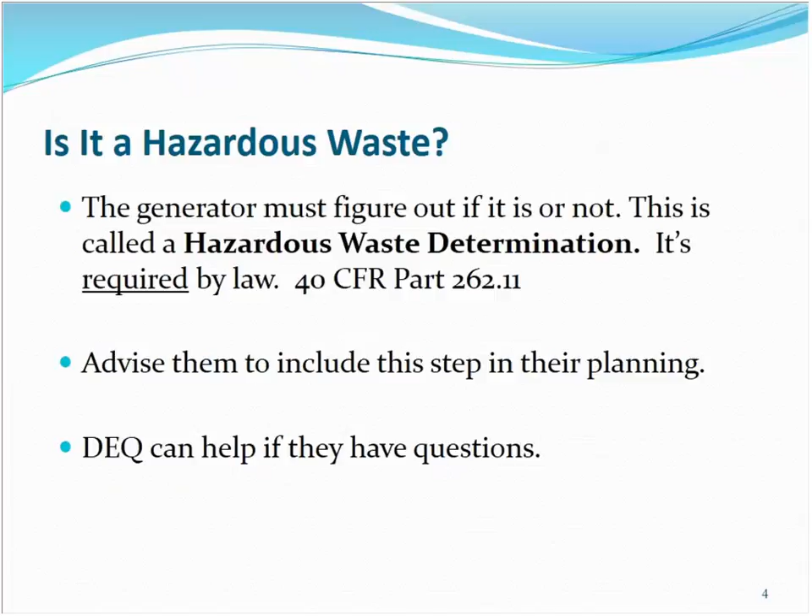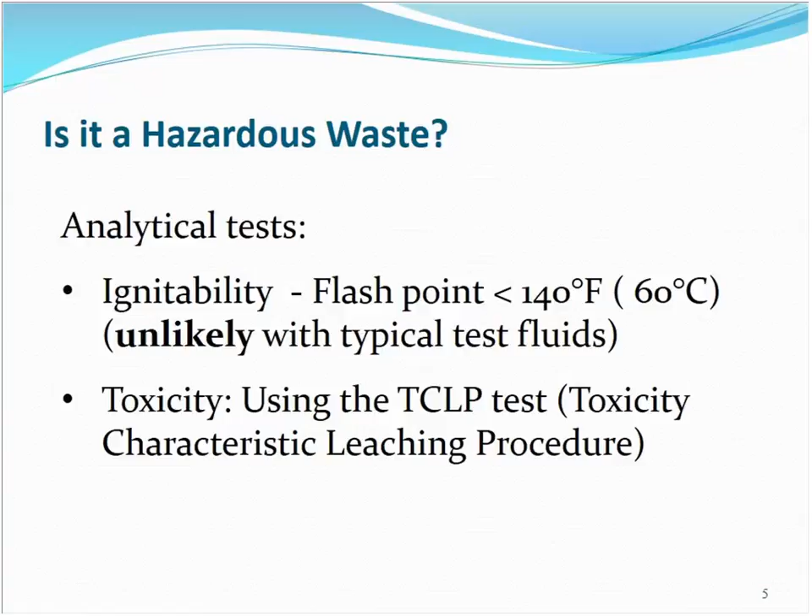So the main things that we would be concerned about with these hydrostatic test fluids potentially being hazardous would be ignitability or the characteristic of toxicity. Ignitability is unlikely, probably because of the amount of water versus fuel, but it's still something to consider with gasoline. And with toxicity, what we're concerned about, of course, is the benzene. And there's a specific test under the hazardous waste rules that we use, and there's a regulatory limit of 1/2 of a part per million or 0.5 milligrams per liter for benzene. If it's over that, in Idaho, it would be regulated as a hazardous waste in these situations.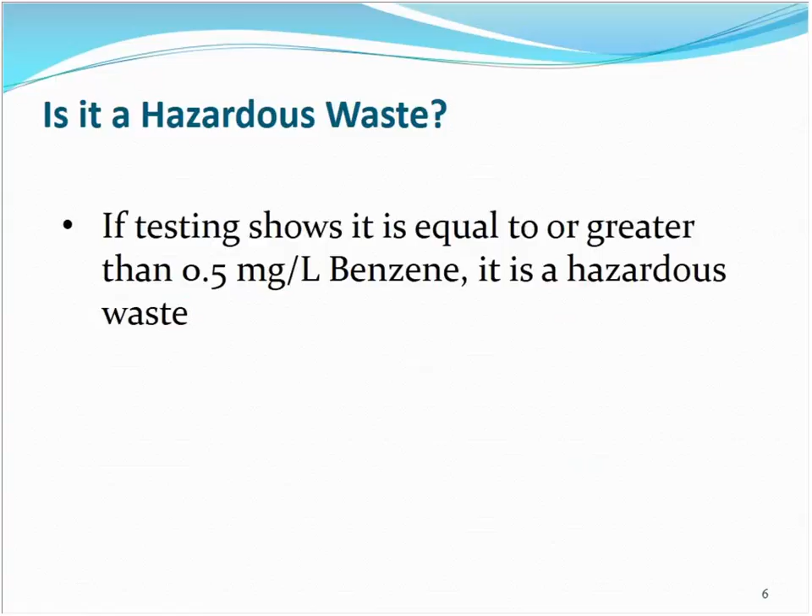Now, if testing shows that the fluids are non-hazardous, there are several options. It could potentially be shipped to a wastewater treatment plant if they'll accept it. It could be discharged into a facility's sewer line if it's in compliance with their permit, and again, if their wastewater treatment plant agrees to accept it. There are some solid waste landfills that can accept liquids and solidify them prior to placing them in a landfill. We have a commercial solid waste landfill in Idaho called Idaho Waste Systems that can do that. And we're also telling folks that they can't dispose of the test fluids, even if you've determined that they're non-hazardous. We're not going to allow those to be disposed onto the ground or into surface water, into storm drains, or anything like that.

If as a result of the testing it's determined that it's hazardous due to benzene or anything else, then of course they would be required to follow the hazardous waste requirements. And there are rules for dating, labeling, keeping containers closed, how long you keep them on site based on your generator status, that kind of thing until you ship it off site. And you would have to use a hazardous waste transporter and be in compliance with the DOT requirements. Or you might be able to check again with your wastewater treatment plant to see if that's also an option. Or another option is to send it off for reclamation, where the petroleum constituents are recovered to continue to be used as a fuel. Or also a generator can choose to go ahead and ship it off-site as hazardous waste, using a hazardous waste transporter and shipping it to a hazardous waste treatment storage disposal facility.

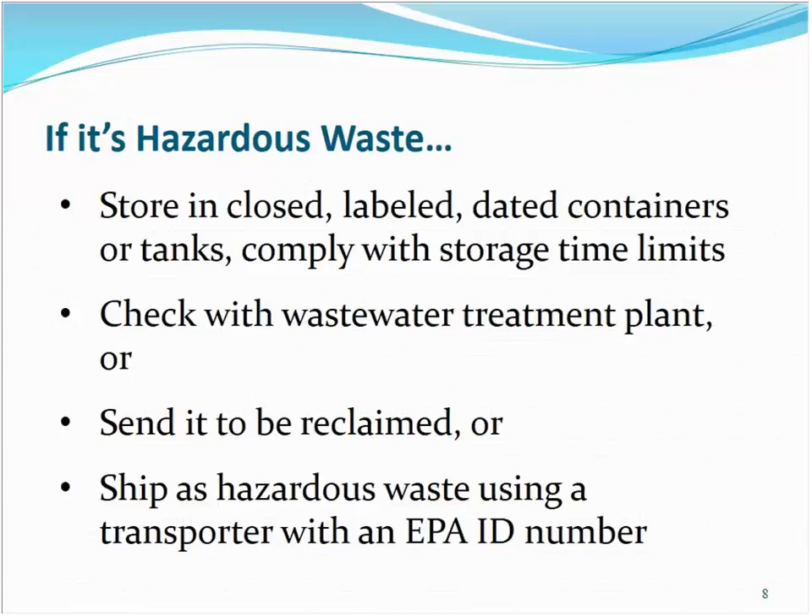Another question that's come up for us is who will we say is the generator of the waste? Is it the owner or operator of the gas station, or is it the contractor that they hire to do the testing? Under the hazardous waste rules, more than one person can actually be the generator. You can have co-generators, or one entity can choose to be the generator, and so we're recommending that everybody come to agreement if they're hiring somebody to do these tests.

They should agree on who will assume the duties of being the generator and who will make sure that any proper testing takes place, and then ultimate disposal, and who will keep all of the records and paperwork associated with that. So that's something that they need to talk about and know who is going to take on those responsibilities.

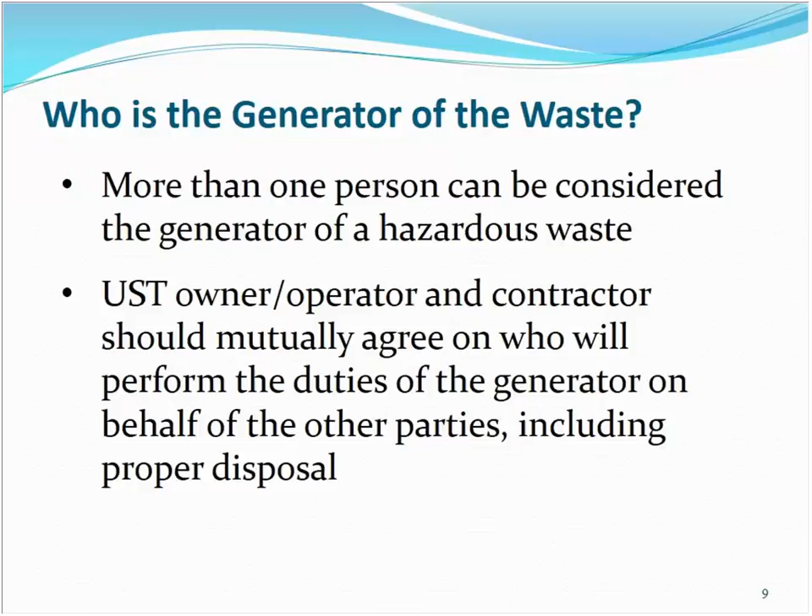And then our underground storage tank program is letting folks know, of course, like has already been talked about today, that there are other methods where they could avoid having to test and manage the fluids potentially as hazardous waste, the vacuum testing method, or the double-walled sumps, where the testing is not required. So that's about all that I have, unless anybody has any questions.

So we're taking a pretty conservative approach in Idaho. And again, I would prefer to take a different approach at some point if we can, like Heather will talk about in Missouri. She raises some really good questions. So I'm hopeful that at some point we might hear some different direction from EPA on this. But that's the path we're taking at the moment in Idaho.

Awesome. Well, thank you, Natalie, and you actually did a great job of answering a couple of the questions that came up in your presentation, which is perfect. I do have one that's pretty specific, and I'll try to read it off accurately here. So the question is, if sumps or buckets are cleaned prior to filling with clean water for the hydrostatic test, would the test water be considered a de minimis loss and therefore allow the tester or owner-operator to dispose of it in a storm or sewer drain?

Definitely not into a storm drain, even if they do determine that it's non-hazardous. That's a policy we've implemented. And unfortunately, even if they've wiped out the spill bucket or sump really well with absorbent pads or something like that, because the benzene is regulated in such low parts per million levels, the 0.5 milligrams per liter, it would be difficult to know if the fluids were below that or not. So for now, we're saying it would be required to test it, but I'm hopeful that at some point maybe we can take an approach with generator knowledge where we wouldn't have to say that.

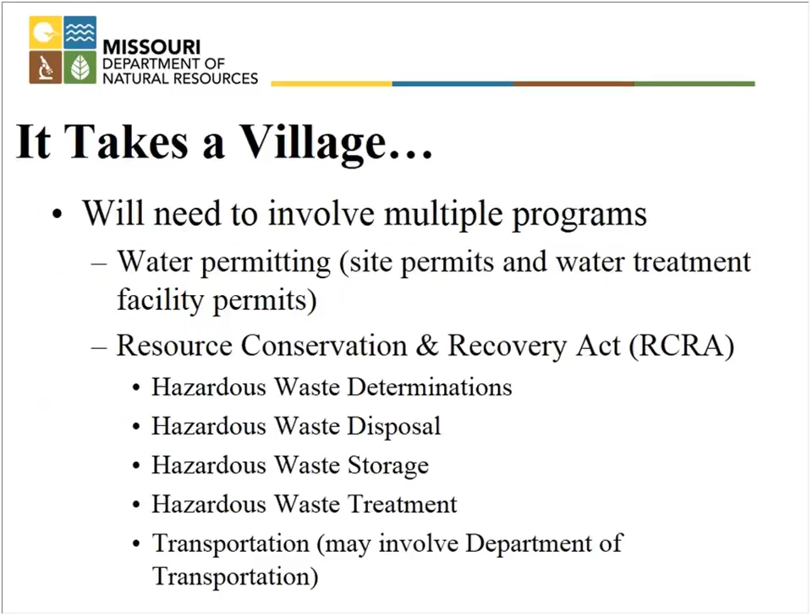So I'm not going to get into this in great detail. I think Natalie did a great job of covering it, but there is a requirement to do hazardous waste determinations. But there are some exemptions depending on what your material is. And so one of the things that we discussed with our RCRA folks was the benzene exemption. And the benzene exemption talks about how anything that's petroleum contaminated media that is subject to some sort of corrective action under the UST rules is not a hazardous waste. Specifically for some certain characteristics, benzene is included.

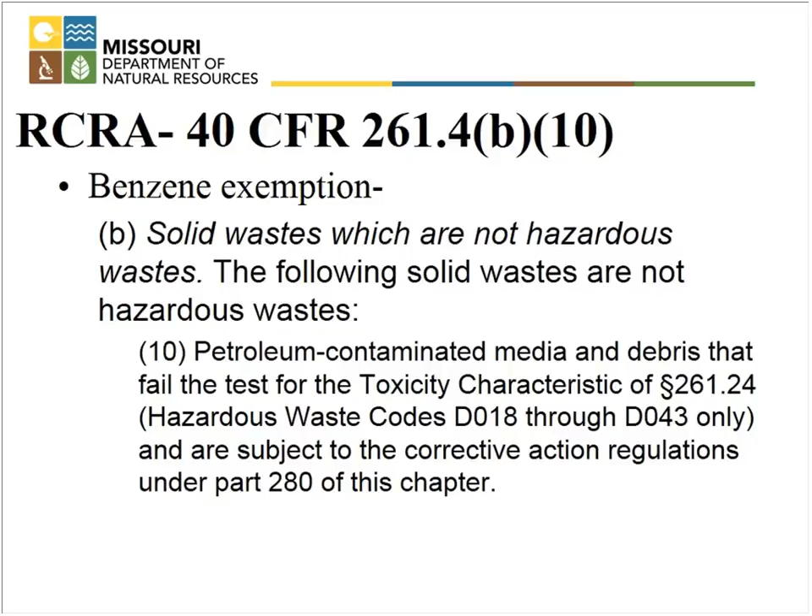And what we discussed was that we believed that if we find water or product in a required containment sump, one that's going to require this testing, they do have to address it. They have to do something with it. They have to remove the water. They not only have to remove product, but also figure out where it comes from. So we determined that we believe these wastes were subject to this specific exemption. Again, your state may have different answers. It is definitely something to discuss.

So we decided that yes, if it is product, it's a leak from the primary system, and it has to be addressed. Also, if there's water, like I said, it has to be cleaned out. So no matter what, you have to do something. But be aware that is just for benzene. That specific exemption does not apply to ignitability or some of the other characteristics. Benzene is the one we're probably looking at, though, for our petroleum.

It also applies to the absorbent materials, and we're not going to go into great detail today, but just be aware that we handle the absorbent materials slightly differently, but they are a key part of this discussion. We do not recommend that you let them dry in any sort of containment sump, whether it's under a dispenser or in the tank top. They should dry in a protected area, but we do recommend drying them before trying to dispose of them. And we have a lot of additional guidance on this.

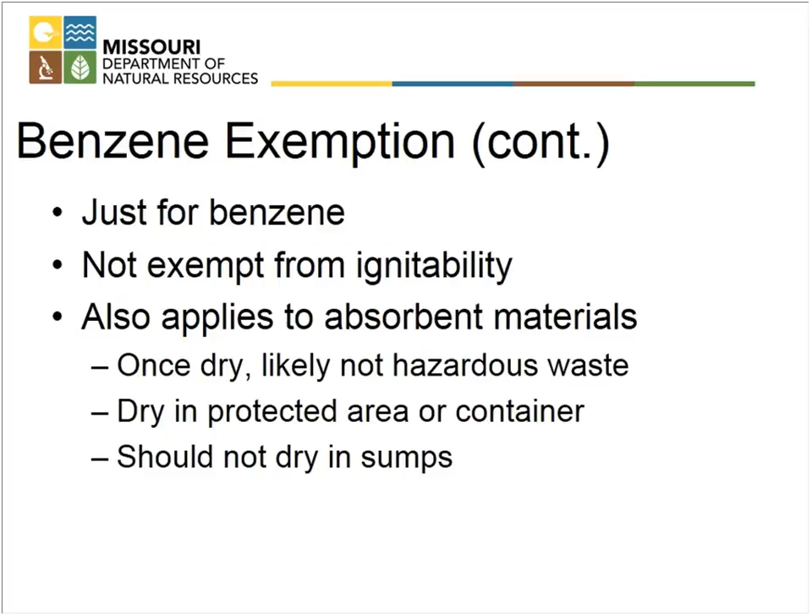So we started with our water program, and with our water program, we discussed specifically first the use of an on-site oil water separator. For a lot of our larger facilities, like our truck stops, they do have on-site oil water separators. And so the question came up, can they use their on-site oil water separator to dispose of the water when they are done with all of these tests? And the answer for most of ours was yes. As long as the oil water separator has been properly operated, they can dispose of it through our oil water separator. And I'm going to get into a little bit more detail, I think, on that later.

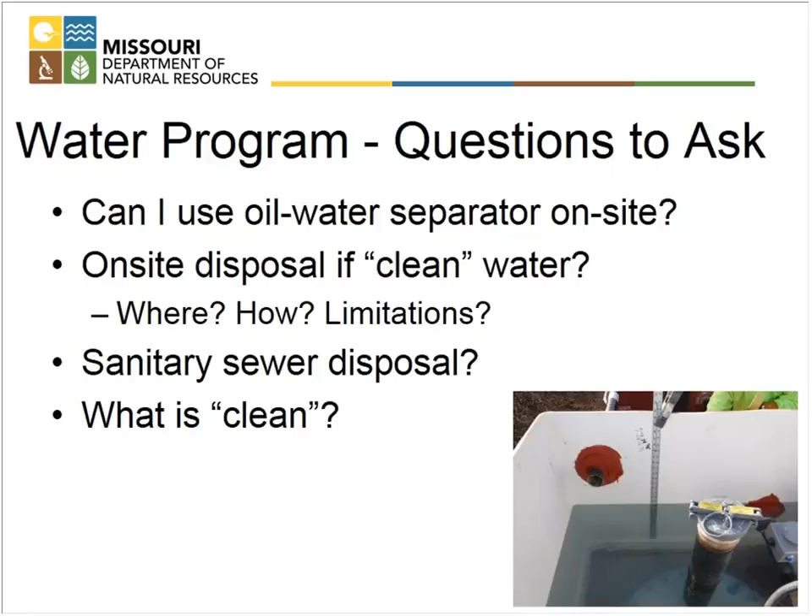Again, we discussed whether or not we could do on-site disposal of clean water, and you needed to ask where and how and what those limitations were, whether they could dispose of it in the sanitary sewer. And the key question that came up for both water and for our hazardous waste program was, is this water clean? So when we entered into this discussion, in the tank world, we're used to dealing with just our tank sites. But of course, our partners in the water programs and in the RCRA programs deal with a lot of different substances and a lot of different facilities.

So one of the first key points that we started with is we're talking about our gas stations. And so we did limit our guidance specifically to the gas stations because we know what those substances are and we know what those products are that we have at those facilities. So we're not talking about a whole large range of chemicals of concern and products. We were talking specifically about gas and diesel for the most part.

One of the key points that we also discussed was something that Ed went over very clearly, and I thought he did a great job covering in his discussion of RP 1200, was that before you do your sump test, that containment sump is supposed to be cleaned. So we have a clean sump before we start, and we are dealing with products that we understand and we know.

So as we do these tests, and we see water standing in these areas, and we're not talking about water that's flowing and that's moving at some sort of high rate, it's water that's standing in a containment sump, it's pretty easy to identify petroleum on water, especially when it's standing. We're going to see a sheen, we're going to see some sort of measurable product. And then what we did next is we recommended using petroleum absorbent pads if they saw any sort of sheen or any sort of identifiable petroleum in these areas.

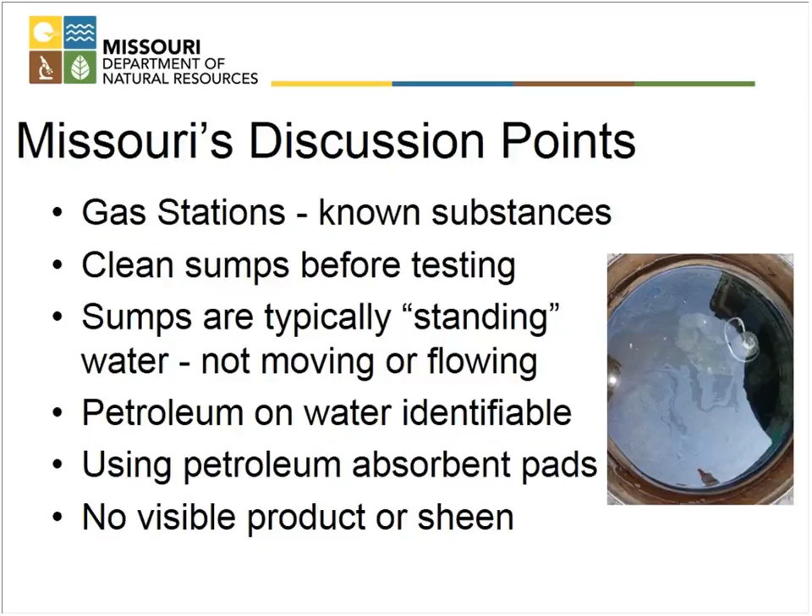So when we defined what clean water was, we talked about it being water at these gas stations in the containment sumps with no visible product and no visible sheen on it. So we narrowed down the scope of our document and our determination and tied it to these specific points. And we found this to be very helpful in moving forward with our discussions with both our RCRA folks and our water folks.

So it came back, if water is clean, so now we figured out what we thought water being clean from these test procedures would be. It's been cleaned, there's no sheen when we're done. Some of the options that our water program came up with was that it could be land applied. Now, that doesn't mean dumping it into a ditch, that doesn't mean dumping it somewhere where it can run off, but basically they could water the grass with it if that's what they wanted to do. As long as it was clean and we'd already gotten through that step, then they could go ahead and water all their landscaping with it, and that was okay.

The sanitary sewer discharge was allowed, but since those sanitary sewer discharges are regulated and they're under the authority of the recipient of that discharge, you did have to ask for permission and make sure it was okay in that city or in that sanitary sewer district that you could discharge your clean water through their sanitary sewer.

As I said, our water folks agreed that it was fine to go ahead and run it through their oil water separator. Of course, the key on this one is they can't be using any sort of soap or surfactant. We're going on the assumption that we're going to have a petroleum layer and a water layer, if they have any. Again, we think it's already been cleaned, though. And of course, last but by no means least, if you want to handle it as a hazardous waste and do many of the things that Natalie just discussed, that is still an option on the table, and that is still a perfectly viable option on how to handle that water disposal.

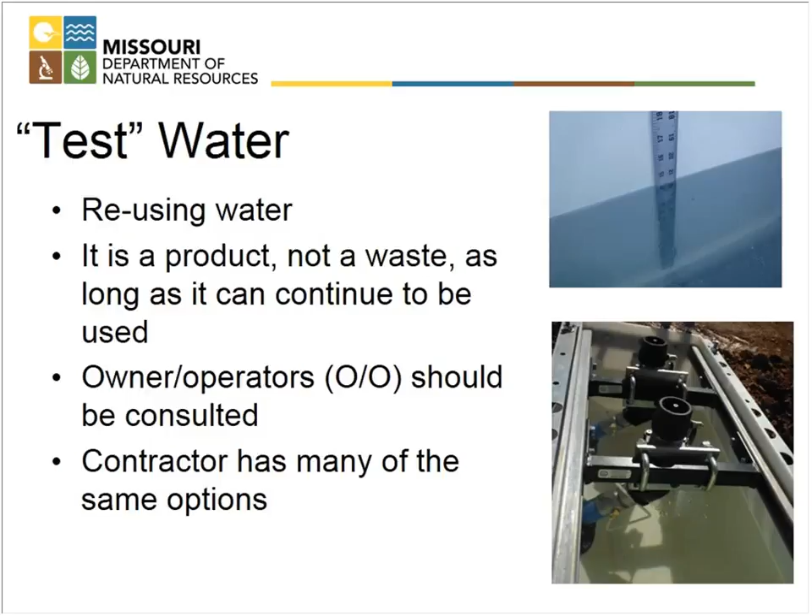One of the things to consider when looking at this test water in these tanker systems is, what does your DOT say? I recommend before anyone proceeds on this step, they definitely talk to their local DOT. Be aware if you cross state lines, these answers may be completely different, and that may change your disposal options and handling options. We recommend talking to your local DOTs, any DOTs in the area you're operating, and the federal one if you're crossing state lines.

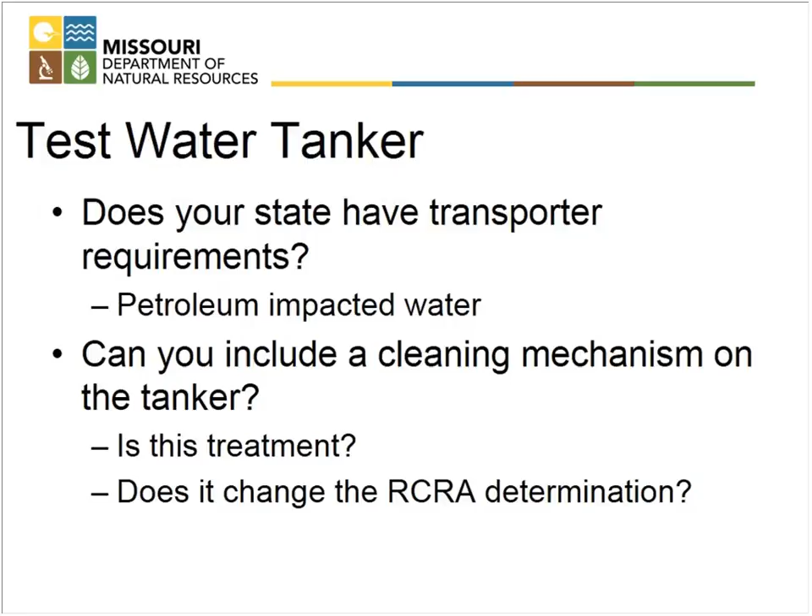Some other questions we'd recommend discussing: if you have a tanker using some sort of cleaning mechanism—whether they're cleaning it as they go between sites, skimming it, or putting absorbent materials on it—does that change your state's answer on whether it's a hazardous waste? Does it change the status of that tanker en route? Are they doing some sort of RCRA treatment or resource recovery? Is there something in that process that changes how they're reviewed, both under hazardous waste and under DOT? These are questions we'd recommend you bring up as you look for options to create guidance for your state.

When we had these meetings, and this was not a fast process, the more people you get involved, the better ideas you get, but sometimes it takes a little while longer.

Some of the things that came up in these discussions were big picture items. Is the guidance we're coming up with really serving a detailed environmental protection? Are we really creating a benefit? One of the things the owners and operators brought up, validly so, was that we're talking about containment sumps at operating gas stations. They have surface drips, leaks, and spills, and at the end of the day when they close those tanks, they'll have to do sampling and closure to address those things. Is this adding to what's being found or released at the site? Is it providing an extra benefit that is necessary?

Of course, one of the discussions that came up was, is it cost effective? What are we talking about financially? We're already adding a lot of new requirements under these underground storage tank rules, and we're adding a containment sump test piece. Is the disposal of the water going to be more expensive than the test in the first place?

I don't know about other states, but in Missouri it's typically our underground storage tank inspectors that are at our underground storage tank sites. Unless something's gone wrong, we don't have a lot of other inspectors at these sites—not necessarily. Some of our bigger sites and multi-use facilities do, but for our regular gas stations, they may not have a whole lot of RCRA inspectors or water inspectors at their site. How much additional oversight are you adding to your state when you come up with your final guidance document?

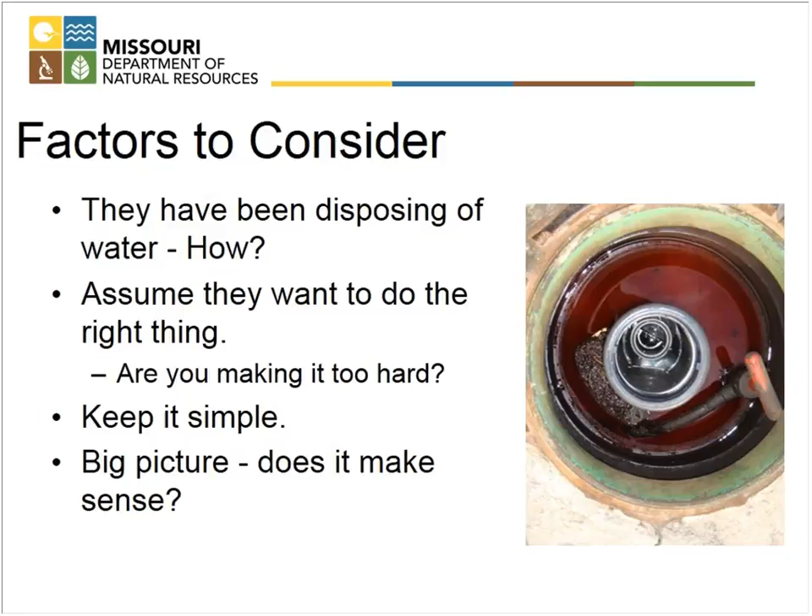So what we found is the simpler we kept it, the easier that worked. And big picture, did it make sense when we were looking at the site as a whole?

And then, of course, as regulators, some of the things we were discussing: if they dispose of it on site the wrong way right now, how will we know? Are we going out to these sites? Are we watching for disposal? Probably not. How often are they doing it? They're not telling us that they're doing these containment sumps typically, at least in our state they don't.

One of the things we did when we created our guidance document is we tailored it specifically for our gas stations, designing it primarily for gas and diesel applications. If we have hazardous substance facilities, or even some maintenance facilities with other substances, this is not the applicable guidance document for them.

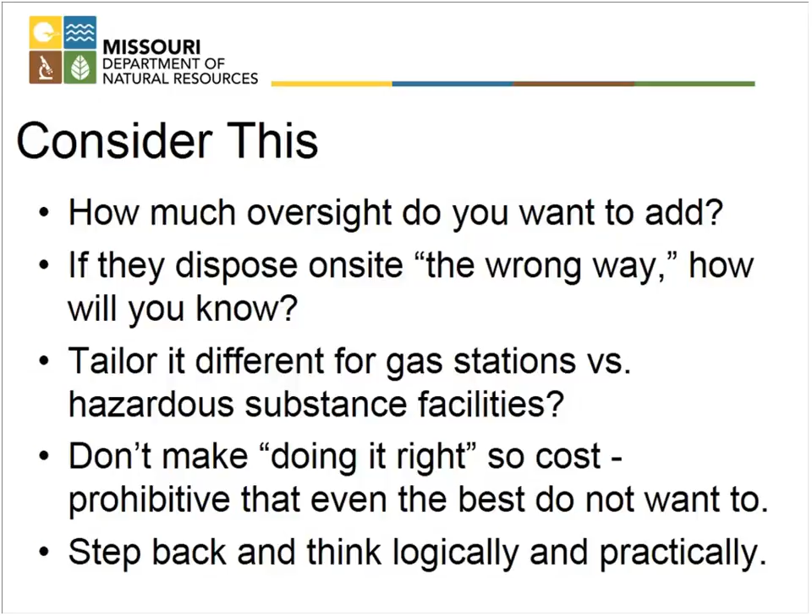But we did want to make sure that doing it right, or doing it the best way they could, wasn't cost prohibitive, that it didn't discourage them from doing the right thing. We wanted to come up with options where they would actually follow through on what we were doing. And last, but by no means least, we want to step back and think logically and practically.

At the end of the day, our goal is to prevent petroleum from entering the environment. Ideally, that's what we're shooting for. And so when we were developing our guidance document, did we come up with an answer that when implemented in the real world would be practical?

What we meant by that is, if we set the goal so high and make it so expensive, there's a good chance they might not be doing that. But if we come up with real options that really do try to prevent petroleum from entering the environment, and ways that are relatively easy for them to do, then at the end of the day we're probably preventing more petroleum from entering the environment than with some of the more cost-prohibitive options. So we wanted to make sure our answer met the goal when implemented in the real world.

We did come up with our guidance document. There's a link for it when these are out on our webpage. And the last thing I want to mention is if you found any of this information today from our speakers helpful...